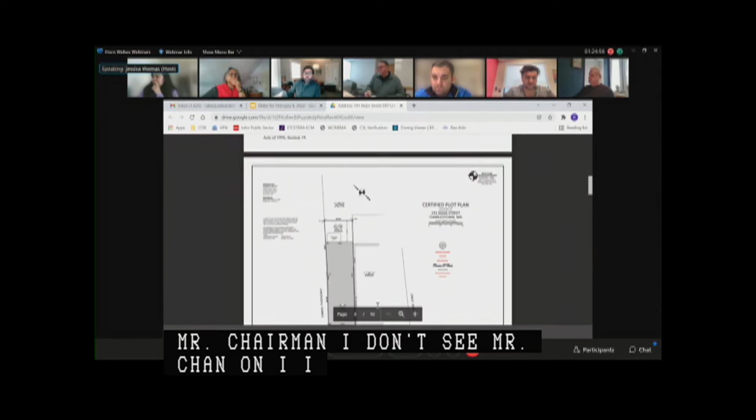This is George Moranci. I'm sorry, I had myself muted. I apologize. Good morning, Madam Chair, members of the board. My name is George Moranci. I'm an attorney with a business address of 350 West Broadway in South Boston. I represent Sing-Ming Chan, the owner of the property at 191 Main Street in Charlestown, which is a single-story commercial building located in an NS neighborhood shopping sub-district.

The proposal is for a new 4-story building, which would have a ground floor retail store with 6 residential units above. The unit sizes would be as follows: the commercial space, 894 square feet at ground level; units 1 and 3 would be 888 square foot 2-bedrooms; units 2 and 4 would be 597 square foot studio/1-bedrooms; unit 5 would be an 896 square foot 2-bedroom; and unit 6 would be a 600 square foot studio/1-bedroom.

The floor plans show on the ground level the retail unit with a basement used for storage only, as well as utilities and a mechanical room. The main entrance to the retail unit is from Main Street, with the residential entrance to the right of that. In the rear of the first floor would be the building's mail and package lobby, with the landscaped rear yard in the back providing approximately 500 square feet of open space.

Each of the 3 floors above would contain 2 units. On the 2nd, 3rd, and 4th floors, as I said, there would be 1 two-bedroom unit and 1 one-bedroom unit. So the total bedroom count for the building would be 9. The building's height would be 41 feet, which is one of the items for which zoning relief would be needed.

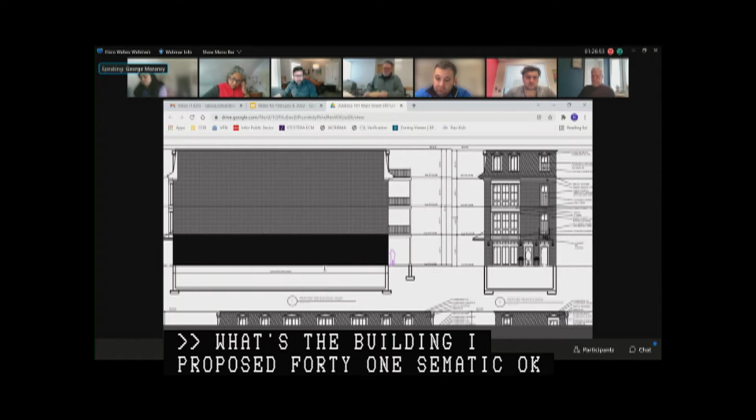The site is within an approximate 7-minute walking distance from Community College T Station. A variance is required for excessive floor area ratio. 2.0 is allowed, 3.15 is being proposed.

The required rear yard setback, 17.45 feet with the shallow lot exception, is being provided. The building would actually have a rear setback in excess of that at 20 feet, but the rear decks are within that setback area, hence the citation for insufficient rear yard setback.

The zoning refusal letter cites a violation of insufficient usable open space, but this is an error. Code requires 50 square feet per dwelling unit for a total requirement here of 300 square feet. As I mentioned, the landscaped rear yard by itself is 500 square feet. In addition, each unit would have an 8-foot by 12-foot rear deck, providing an additional 96 square feet of open space per unit.

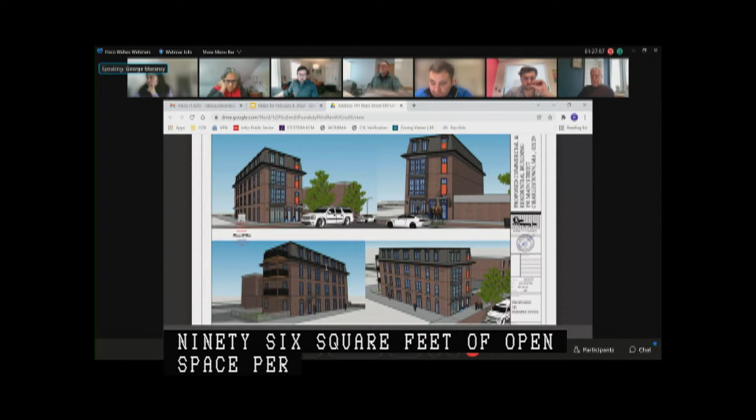The building meets the front yard setback requirement, meaning it would be in alignment with existing buildings on the block. The reason for the citation is that the plans examiner regards the small overhang above the residential entry to be within that front setback area. There would be no roof decks on the building. With that, I'll pause and take any questions members may have.

Mr. Moranci, is this an elevator building? In other words, how are you accommodating your handicapped unit? Looking at the plan set, Madam Chair, there is a lift in the rear that provides access from the ground floor level up to the... I believe there's no requirement, Madam Chair. I did inquire of the architect about that, and I believe it's compliant in a mixed-use building. I'll check my notes on that, but I'm pretty sure I did inquire about that.

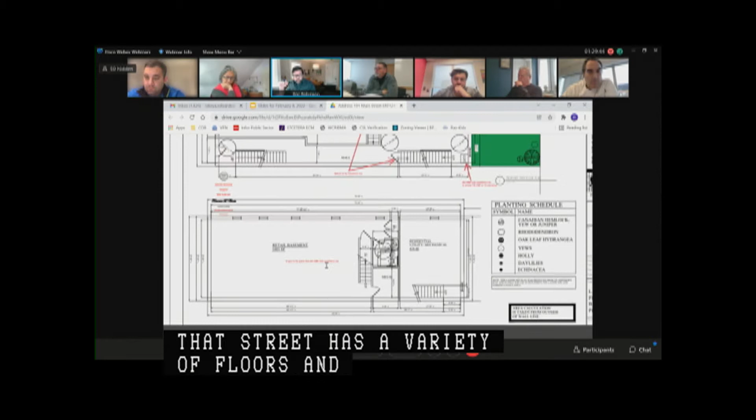How are the plans, Mr. Robinson? So the plans are good. I did have the same question. A lift is actually called out on the ground floor plan, but it doesn't seem to extend to the second floor, or there's a bathroom there. So I think that needs to be verified. And I think the height is above zoning. However, that street has a variety of 4s, 3s, and 1s, so it has a bit of context to it as well. So no questions for me on the proposed scope other than those things.

Thank you. Any questions from the board? Is anybody here to speak in support or in opposition to this proposal?

Good morning, Madam Chair, members of the board. Keaton Stapleton with the Mayor's Office of Neighborhood Services. Our office held an abutters meeting for this project on December 13th. We've received both support and opposition for this project: 5 letters of opposition with 18 total signatures, most relating to the height of the building, parking, and privacy, but also 44 signatures of support. At this time, I'd like to defer to the board.

Good morning, Madam Chair, members of the board. Michael Benetti from the Office of Boston City Councilor Lydia Edwards. The council would like to go on record in support of this project. Thank you.

Madam Chair, Secretary here, I have 2 letters of opposition. I have nothing else. Madam Chair, I have no raised hands at the moment.

Okay, given that information, may I have a motion? I'll make a motion to approve with BPDA design review and no building code relief for accessibility. Is there a second? I'll second that motion, Ligris. All those in favor? Aye. Any opposed? Motion carries.

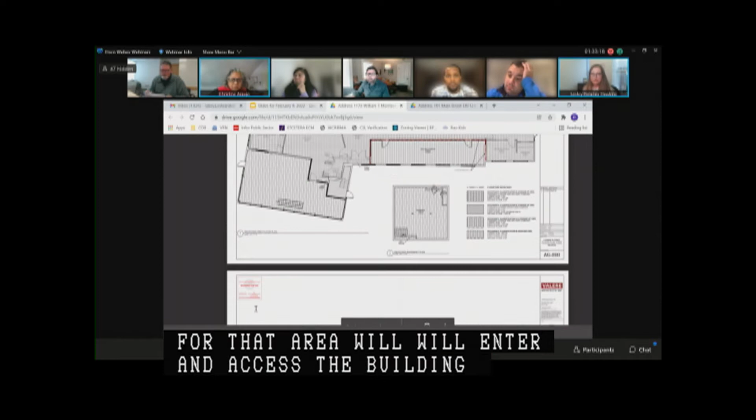Hold on, can you tell us which plan we should be looking at? There are 2 floors. For this purpose, and I know Matt O'Boyle, our architect, is on the phone as well, I would look at page 3 of the plans, sheet A100. So this is the portion that's going to be for the warehouse use. On the far right of the plans, you can see the area in which employees will enter and the secure vestibule to ensure that anyone accessing the space actually has legal access. Sorry, Ms. Edwards, I think the plan is A100, is that what you said? Yes, that will show the plan in more clarity. The sheet you were on is the code review / egress plan. Okay, sorry, please go ahead. No worries, this is the demolition sheet, you want to go down a few more sheets? Sorry. Two more down, I was going to say, so is it page 3 or? There you go, right there, that's the plan, yep.

All right, thank you, Matt. So again, on the far right, this is where our employees for the warehouse use will enter and exit into the secure vestibule where they'll be ID'd. At the top to your left, you can see the secure delivery door, that's where deliveries of product will be taken, and then they'll be brought into the secure areas for breakdown and storage. So that's the warehousing use.

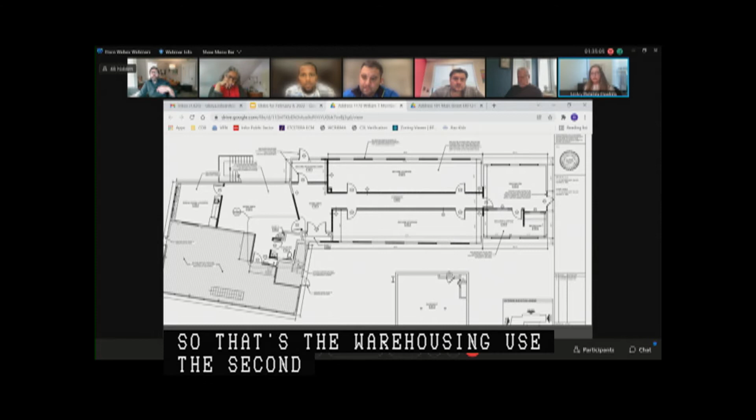The second floor will serve as the delivery-only operator, or courier model. It's almost Uber Eats for cannabis. The vehicles will be dispatched from the office located on the second floor, and they will pick up product from licensed recreational and medical dispensaries and deliver directly to consumers at their address. You cannot have any deliveries outside of an address or to a business. Those employees will enter and exit via the stairway and door at the far left of the plans.

Delivery will take place daily from 12 p.m. to 8 p.m. in 2-hour increments to minimize the amount of traffic in and out of the site. We anticipate a total of 10 delivery vehicles, approximately 4 of which will not be stored on site because they will be for the courier use only, and 6 will be stored on site in the existing fenced-in parking lot for the warehousing use. There is not going to be any public-facing or retail component. This is strictly delivery, so the general public will never have access to this space.

And how many staff are you anticipating being on site? We anticipate approximately 30 employees, a combination of full-time and part-time.

And tell us about your security measures. This will be a fully alarmed and secure building, adhering to all CCC compliance. We will have exterior lighting that will be activated at all times. We will also have 10 internal cameras and 8 external cameras, and of course the City of Boston and the state will have access to that footage, which will be stored for a period of 90 days.

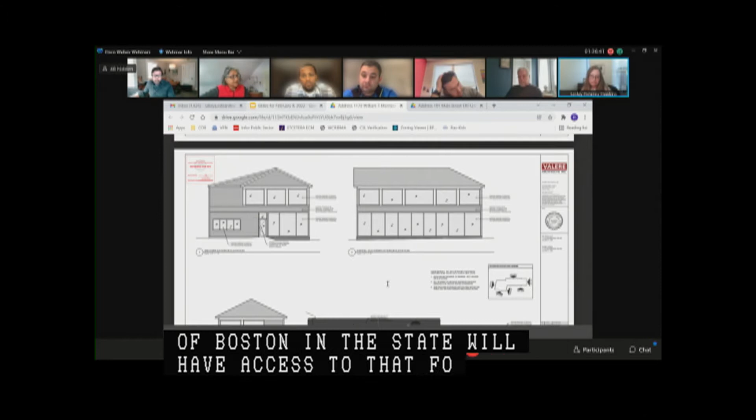Has this been approved by the Cannabis Commission? Yes, it has. The applicant has appeared at 2 separate hearings before the BCB because the 2 license types were actually promulgated by the state at 2 separate times. So we've been going through this process for a significant amount of time. I believe the BCB submitted a letter of support, and Councillor Baker submitted a letter of non-opposition.

Hold on, we'll hear that from the Mayor's Office of Neighborhood Services and from the City Council, but we need to understand the technical details from you. Can we go to the site plan to see how parking will be stored on site? Tell us which drawing we should be looking at.

Matt, which drawing would you suggest? That would be the first sheet.

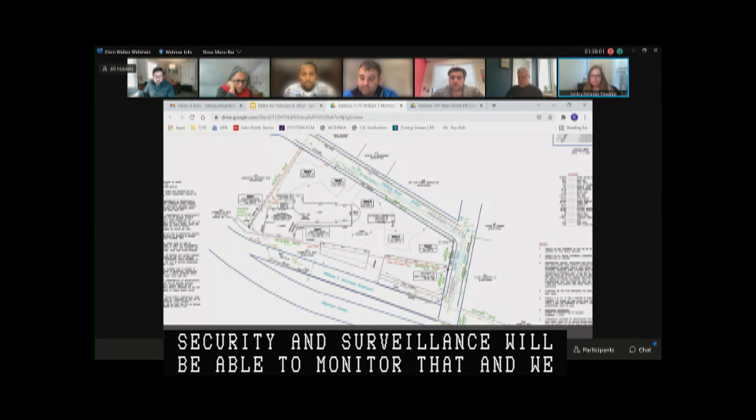Our staff and employees will access the site via one of the 2 existing curb cuts. We also will not be allowing our staff to utilize the adjacent residential streets. That was one of the conversations we had with the neighbors, and because of the extensive security and surveillance, we'll be able to monitor that, and we will be implementing a demerit system for any employees who do utilize those residential streets. So are there any curb cuts on the residential streets, or is every access through Morrissey Boulevard? There are no curb cuts on the residential street.

Are you proposing any screening and buffering to the property or any signage? There is an existing fence which we will be maintaining and repairing, and there is an existing billboard which is not our property and we will not be utilizing. All signage will be in compliance with all of the BCB regulations as well as the CCC regulations. There are photos on sheet 4 of the existing conditions that will be restored to new condition.

So, what sheet shows the signage? The signage is not shown. It's the fencing that's shown on sheet 4, photos of the existing site. Okay, and what does the state require regarding signage? Is my understanding correct that you cannot show a cannabis leaf? Correct. There can be no slang and there can be no images. There can also be nothing that would be appealing to anyone under the age of 21.

So then the next question is, we know how people's ages will be verified on site, but how are you going to do that through delivery? Absolutely. The state also has very strict requirements regarding the delivery itself. I know Gabe Vieira, who is the actual applicant. Gabe, do you want to briefly touch on the process for identifying consumers once you're delivering directly to them?

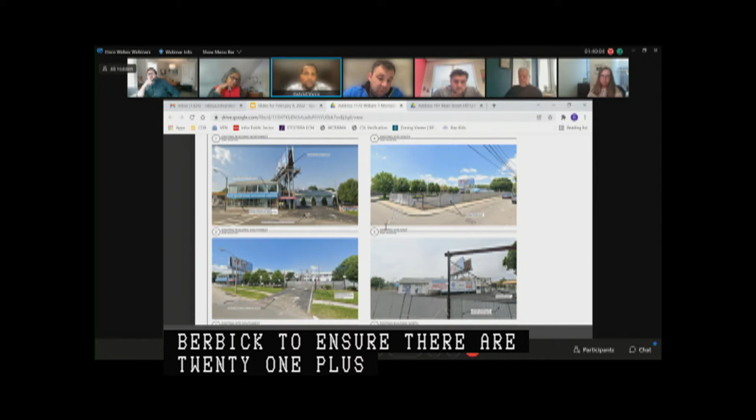Of course. Our company built a tech platform, ziprun.com, which you could look up. We integrated with a company called Berbix, which is an ID verification checker. So before any consumer can receive a delivery, they have to upload their ID via our integration with Berbix to ensure they're 21 plus. Then once our driver gets to the consumer's doorstep, they check the ID once again, so we're double checking the IDs to ensure consumers are over 21 years of age.

There are also tracking mechanisms on all of the vehicles, and at least one of the delivery employees—there are always 2 in a vehicle—they're constantly being reported via the reporting system required by the state. And is there a lockbox in each vehicle? Correct, yes.

How are the plans, Mr. Robinson? The plans are fine in terms of the proposed scope. I do think that, you know, this is a very prominent site. I have a lot of familiarity with it, so I think we need to make sure the site receives a little bit of care. It's been in a state of disrepair for many years.

I do have a question, maybe not at hand, but on the billboard itself. When I was working on the site previously with the Sozio owners, they told me the billboard was—I don't know the terminology—but local to the business directly at hand. It is not a public billboard, it's a private one.

So how is that going to remain and not be used by you as the operator of the site? In our lease agreement, we have no legal right to the billboard. We're not proposing to use it. That has not been a discussion with the landlord. So does that mean the billboard will be removed because Sozio is no longer on site?

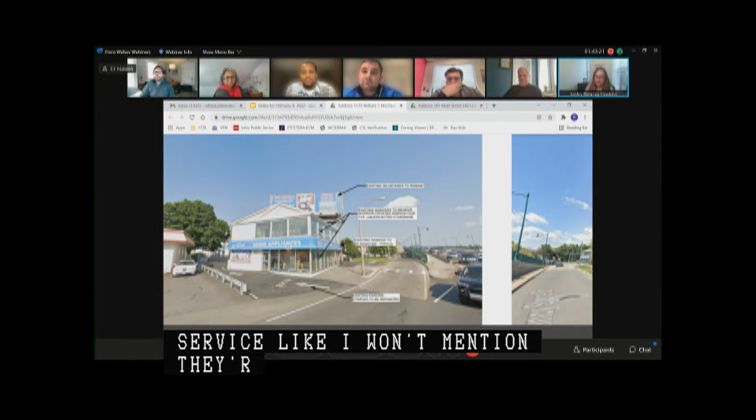And are the drivers employees of the firm, or are they one of these, shall we say, less... Yes, they're direct employees. You're not using a service, I won't mention their names. Correct, they are direct employees, and the vehicles cannot be the drivers' own vehicles - the vehicles are also owned by Ziprun. Okay, I'm very glad to hear that. Is that part of the requirement for delivery establishments? Yes, it is. Good, that's a good move. All right, thank you.

And will the vehicles have any signage in them? In other words, will the drivers be at risk through the signage? No, there will be no signage on the vehicles that would indicate that there is cannabis within the vehicle. Okay.

Just on the vehicles real quick, are there requirements to keep the vehicles updated or just any vehicle that works? The CCC conducts an inspection of all of the vehicles as well as the site, and we have an annual renewal process that we must go through as well. So they do monitor them, and as one of the first delivery operators in the Commonwealth, we'll be updating and adhering to the rules and regulations as they may change.

Is there a limit on the amount of vehicles that you can have going in and out? Like how many couriers you can have going at once? There is not a limit on the specific amount, but we are limiting it to 10 vehicles, and they'll be in 2-hour increments. They'll go out for a delivery and do a series of staff deliveries within that 2 hours, so they're not coming back and forth to create additional traffic.

And what is the catchment area for the deliveries? How far do you go from the base? Gabe, how far are you proposing to deliver? As of right now, we're starting with the 10-mile radius, and we don't really plan to extend that past 15. We want to keep our delivery focus on the greater Boston region. And is that also something in the regulations, or is that just your decision? That's just our decision.

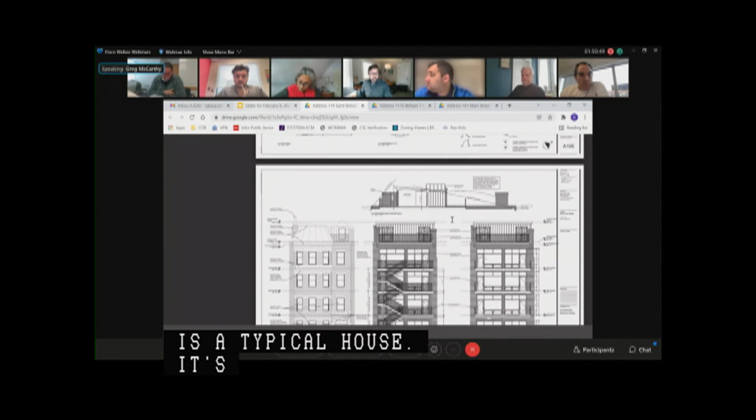Do I have control of these plans right now? No. Is it possible to go up one more page? So here's the layout of the penthouse level. This square right here, coming up the stairs, is where the existing head house is. We had to make several changes.

So tell us, what is that thing labeled loft? I have my architect on here as well, I forget what it's called. It's the dome on top of the building. Okay, so it's not habitable, it's just... It's just existing, they're all along St. Botolph Street. Okay, got it.

So hold on a minute. How are the plans, Mr. Robinson? Plans are good, no question. I think the rear decks are encroaching on an area that can handle it, it's really a public alleyway behind, with a very large building that fronts the other side.

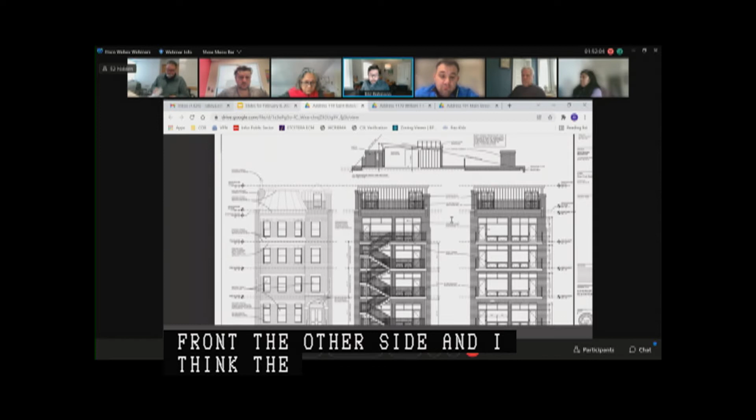And I think the addition, which I think is more of a floor, is pulled back quite a bit from the street, and it's hidden behind this sort of turret thing, and there is no roof deck toward the main street side. So I don't have any specific questions about the proposed scope.

Any questions from the board? This is not really a roof deck, is it? I mean, this is another floor. It feels like another story is what I believe. Yeah, is what it really is.

How does that mesh with the other neighboring abutting buildings? So most of them don't have any additional floor. They do have head houses of various sizes down the block, so this would be the first of a larger size. There's one down closer to the corner of, I don't remember, Cumberland maybe, probably similar in size and pulled back as well, but the rest are more traditional roof head houses of various sizes along the way.

So there's some precedent on this side of the street, but it does step up to a 12, 14-story building on the backside, so there's a lot of scale behind it.

This is a question for the applicant. Is this in the architectural district? Yes, it is. And have you started any conversations with the staff there on that?

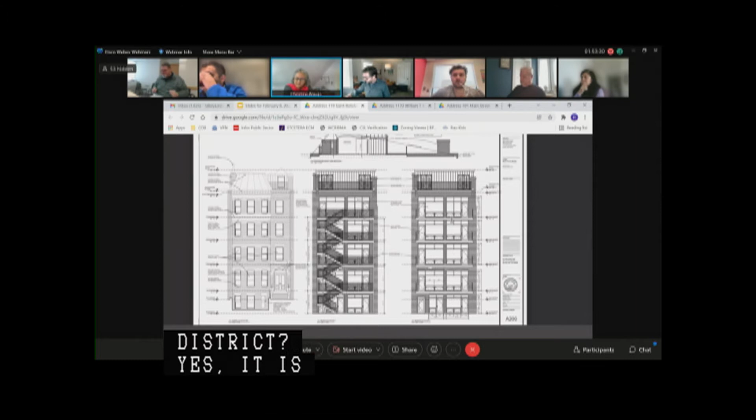Yeah, we actually had a very long process with them. They were willing to meet with us before we made our design, so we could get some input on what we'd be able to do. Also, part of the attraction down there on St. Botolph Street is that a lot of the buildings have been brought back to their original details, so they were able to give us input on what we could do to make it look like the buildings next door.

Thank you. Hold on a second, sir, go ahead. Any other questions from the board? Is anybody here to speak in support or in opposition?

Good morning, Madam Chair, members of the board. Molly Griffin from the Mayor's Office of Neighborhood Services. Our office hosted an abutters meeting on December 13th, 2021. The applicant addressed concerns and answered questions from immediate abutters who attended that meeting. At this time, our office would like to defer to the board's judgment. Thank you.

Madam Chair, I have no raised hands at the moment. Given that fact, may I have a motion, please? Sorry, but we also have a letter of support from the Architectural Commission. Hold on, can you hold on please? This board is in conversation here. Oh, sorry. May I have a motion, please?

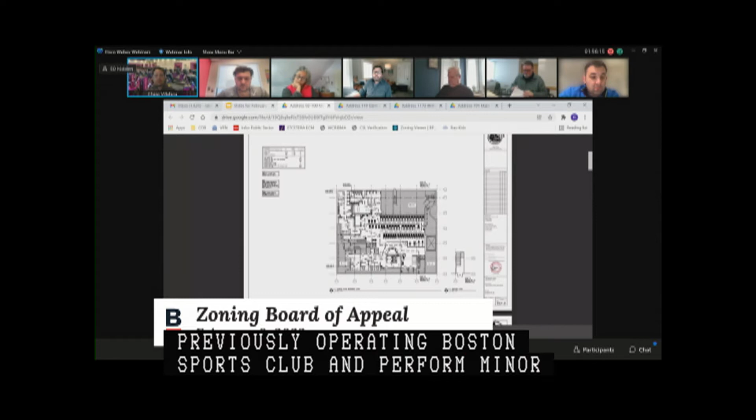I'm here today, and we're proposing to take over the previously operating Boston Sports Club and perform minor interior alterations to the cellar and sub-cellar spaces which the former Boston Sports Club occupied. The storefront area on grade will be utilized for entrance and exit only to access the cellar space where the gym will be located.

Mr. Villafana, the reason you're here is that the 24 hours is conditional use. So tell us about your 24-hour proposed operation, the anticipated number of people coming during off hours, and how you control for security during those midnight to 4 in the morning hours.

Of course, Madam Chair. Our staff is trained in management disciplines for overnight hour operating. We have intelligent camera systems within the store and on the exterior of the building. The total number of cameras for this location is 23, and we utilize a 90-day backup HDR hard drive. During the overnight hours, we have anywhere from 15 to 30 members that come to utilize our gym. The reason we specifically request to operate 24 hours is based on our company ethos, which is diversity and inclusion for all members of the community.

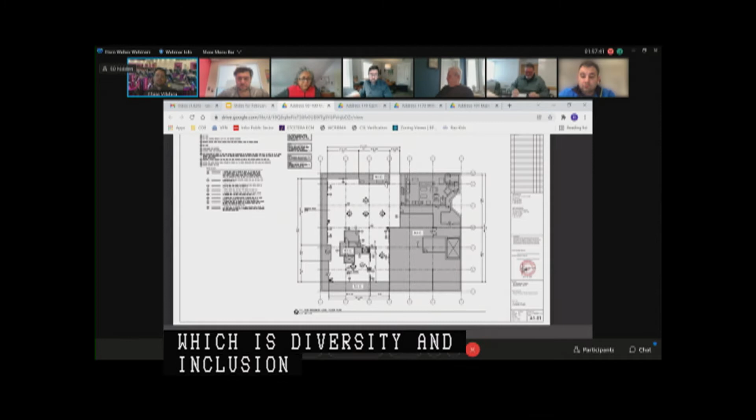Okay, so tell us how many other Planet Fitness locations within the city of Boston are 24 hours. We have 4. The closest one to this location would be our Winter Street location. And which other ones? Dorchester, Jamaica Plain, Hyde Park. There's a few others at the top of my head. They're all 24 hours? Yes, they are, Madam Chair.

Okay, how are the plans, Mr. Robinson? Plans are good, no question. I guess I had one question on access. So the access to this will be through the common building entrance, is that correct? And then the space itself is in the lower level?

That's correct. As I mentioned previously, our space is in the cellar and the subcellar. The storefront entrance on Massachusetts Avenue is solely ours, but it's entrance and exit only. There'd be no operating on the ground level. So all operations will take place in the cellar and subcellar. Okay, that was my only question. No other questions about the scope. Thanks. You're welcome.

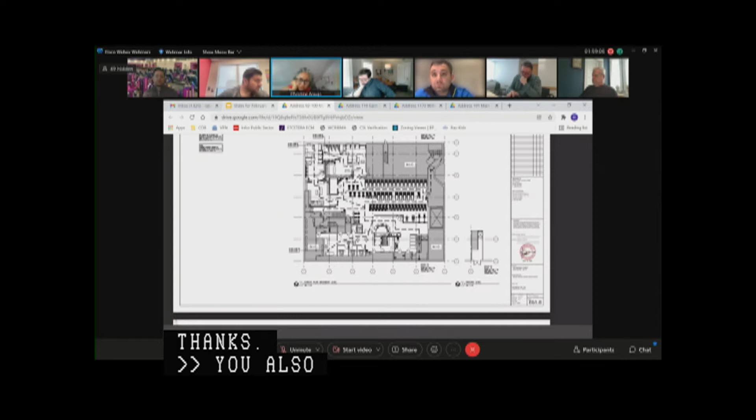Any questions from the board? You know, the thing that strikes me is that this location is very close to BU. I just want to make sure you guys explain what the system is for controlling students or others who may be inebriated at odd hours. So if you're on Massachusetts Avenue, you have to enter via the storefront.

The storefront is about 5 by 5. To access the space, you'd have to come down the stairs and physically walk past our front desk, which we always have staffed 24 hours a day. So if someone came inebriated into our gym, we'd know they weren't a member or that they were inebriated, and we'd probably ask them to leave in that instance.

Okay. Any other questions from the board? Is anybody here to speak either in support or in opposition of this proposal?

Good morning, Madam Chair, members of the board. Molly Griffin from the Mayor's Office of Neighborhood Services. At this time, our office would like to defer to the board's judgment on this proposal. We hosted an abutters meeting on December 16th, 2021. The applicants addressed concerns or questions from neighboring people and businesses. At this time, I have received no letters of support or opposition, so we'd like to defer. Thank you.

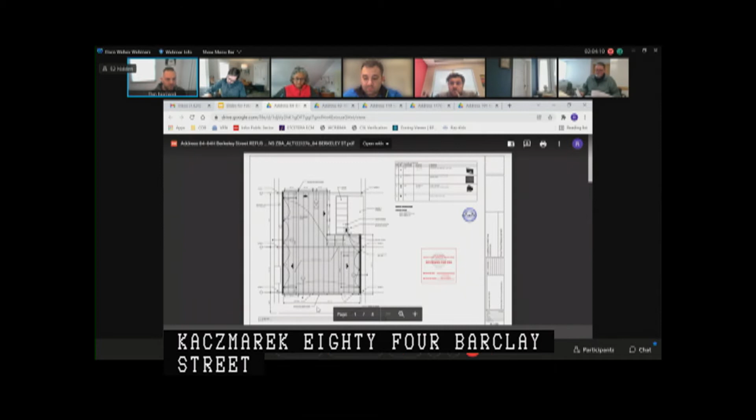Calling the next case, BOA 126-0064, 84 to 84H Berkeley Street. This is a replacement roof deck. The violation is Article 64, Section 34, roof structure restrictions. Name and address for the record, please. Dan Kaczmarek, 84 Berkeley Street. I'm here on behalf of the applicant, Matthew Palmer, who is the contractor for the project. Frank Corsino is the owner at 84 Berkeley, and he's also on as an attendee. So tell us what you're proposing to do.

We are proposing to rebuild a roof deck at this address. The previous deck was haphazardly built and has since been removed for obvious reasons. We are building back the roof deck only and keeping the existing head house that maintains access to the roof. Since this is before us, and usually replacements aren't, was that roof deck legal or was it not legal? And secondly, are you expanding the footprint of that roof deck?

The roof deck footprint is expanded. However, it's entirely within the ordinance requirements for a roof deck in terms of height and distance from rear edge.

Okay, give us the dimensions of that roof deck, please. I don't know if they're on that drawing, but I can check.

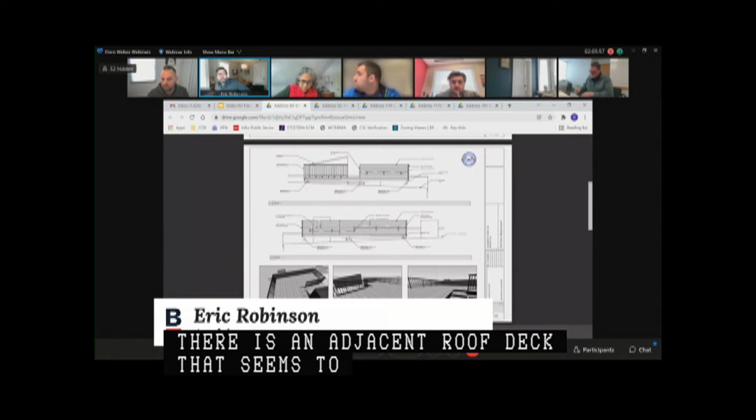While you're looking for that, Mr. Robinson, how are the plans? Plans are good. There is the previous roof deck, which is still on Google Earth, is there. It was smaller and pushed further to the back. There is an adjacent roof deck that seems to be aligning with what they're proposing in terms of its front and rear setback from the streets, and consistent with the adjacent. And the existing head house is remaining. So no questions necessary for me on the scope.

Any questions from the board? Is anybody here to speak either in support or in opposition of this proposal?

Hi, yes. Good morning, Madam Chair and members of the board. Kim Crusilli from the Mayor's Office of Neighborhood Services. Our office held a community meeting on January 4th where no opposition was shown by the abutters. The Ellis Neighborhood Association is also not opposed to the proposal. At this time, we'd like to defer to the board on this matter.

Thank you. Good morning, Madam Chair, members of the board. Ana Calderon from Councilor Flynn's office. The councilor would like to go on record in support. We heard no concerns from the Neighborhood Association or abutters.

Thank you. Madam Chair, Secretary here, we have one letter of opposition. Is there a reason for the opposition? It's 86 Berkeley Street and Mrs. Wong. She is opposed to it because she wasn't notified.

May I have a motion, please? I'll make a motion to approve. Is there a second? Second. All those in favor? Aye. Any opposed? Motion carries. You're all set. Good luck.

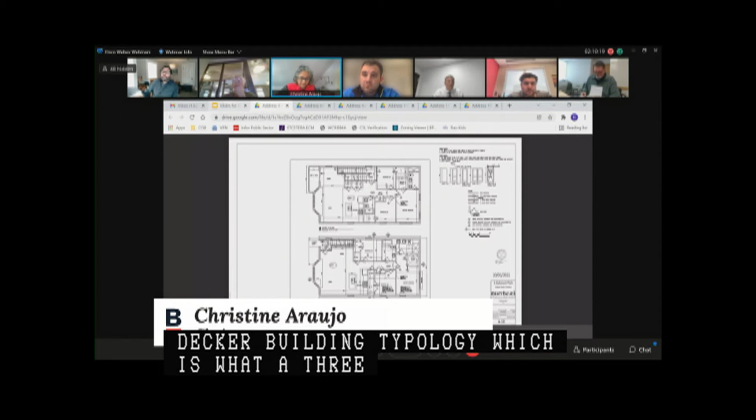Fulgini, before you proceed, have you seen the BPDA's recommendation? I have not, Madam Chair. It's a recommendation for denial because of the density and a number of related issues: open space, excessive building height, and the fact that it does not reflect the triple-decker building typology, which is what a 3FD means. So it seems like they have a serious number of concerns on this one.

So I guess the question for you is, do you want to proceed with this or request a deferral? I think at this point, I didn't understand, I didn't see that. So at this point, we'd request a deferral to meet with the BPDA staff and see if we can resolve some of those issues.

Okay, may I have a motion, please? I'll make a motion to defer. I'll second that motion, Ligris. All those in favor? Aye. Any opposed? Motion carries. The date, please. We're going to do March 22nd at 11:30. Thank you.

Calling the next case, BOA 125-1716, 88 Rockview Street. This is a new single-family home.

The violations are under Article 55, Section 9: floor area ratio is excessive, the building has excessive height in feet, the building has excessive stories, the front yard is insufficient, and the side yard is insufficient.

Name and address for the record, please. Hi, this is Abby Wojtowicz and Joe Charest. We currently live at 85 Rockview Street, Unit 1, in Jamaica Plain, and we are the owners of the lot. We also have Chris Fuller from Helios, our architectural firm, on the line as a panelist.

So let me ask, was this addressed before the Board of Appeal in the past? No, you've checked the record and there is no prior proposal for this address.

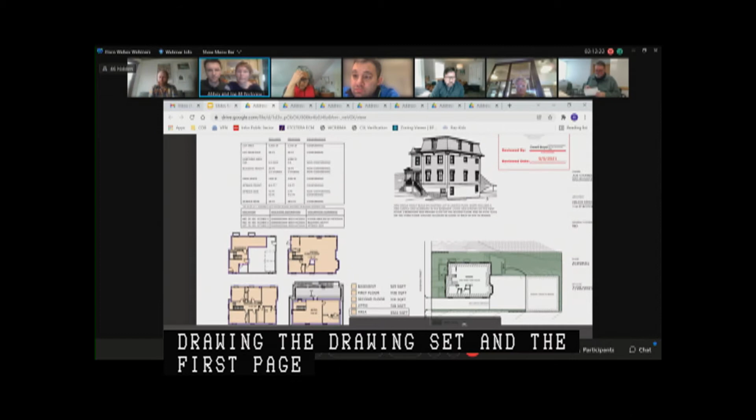Okay, so please go ahead, tell us what you're proposing to do. Sure, we're proposing a single family house, which you can see on the first page of the drawing set. The first page also gives an overview of how the property is situated on the lot. Joe, you can go over some of the violations.

The side yard and front yard violations can be seen here. If you zoom into that part with the green around it - right, the front yard plane of the house is actually not in violation, but we have added a front stoop where the door swings out. Because that front stoop has a small roof on it, that makes it count as part of the dwelling, so that's why it's in violation of the setback.

So you're 3 stories instead of 2.5 stories. Correct. What does that mean for height? How high is the building in feet? You can go to the last page. Can you just tell us? It's 36. And what is the required? 35.

Front yard insufficiency, FAR, what's required and what are you proposing? It's 0.5 is the requirement, and we're proposing 0.6. And what's the square footage of the lot? I think it's 5,500 square feet.

Chris Fuller, do you have that handy? It's 5,470, Madam Chair. Thank you. And is this a one-family zoning district? Yes, it's actually a 2F 7000, so basically for the first unit you need 7,000 square feet.

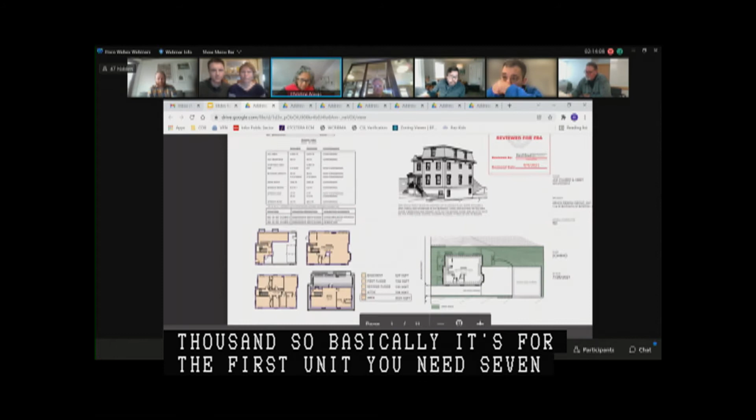And it looks like there are environmental reasons why the building is where it is, because you have a steep slope in the rear. Correct. There's a rock wall there that we don't want to push the house into.

Okay, and how many bedrooms in here? It will be 5 bedrooms. 6. I'm sorry, 5 or 6 bedrooms? 6. Okay, so just for the record, the zoning requires that at maximum you can have 4 unrelated individuals, so if there's any plans to rent out or anything else, please keep that in mind.

How are the plans, Mr. Robinson? Plans are good, just one question. So there is an in-law suite called out on the attic level, is that correct? That's correct. Can you give us a little bit of information on that?

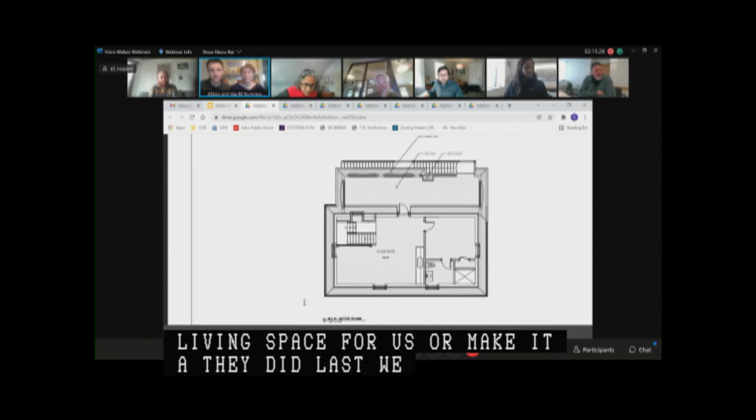Yeah, we're basically finishing the attic area as a living space, and we intend to either build it as just living space for us or make it an in-law suite where older parents could live at some point. So there is no kitchen up there, it's just accessed through the house? It's accessed through the house. I think there could be a kitchen, though.

No, what's before us is for a 1-family, not a 2-family. Correct. Okay, so we just want to make sure that this is, in fact, a 1-family that we're looking at. That's right, that's right. Okay, any questions from the board?

Mr. Ehrlich? No? Is anybody here to speak either in support or in opposition of this proposal?

Madam Chair, members of the board, Connor Newman with the Mayor's Office of Neighborhood Services. At this time, the Mayor's Office would like to defer to the judgment of the board. Some background information, this proposal was approved by the Jamaica Plain Neighborhood Council, and during the community process, our liaison could not recall any opposition or concerns. Thank you.

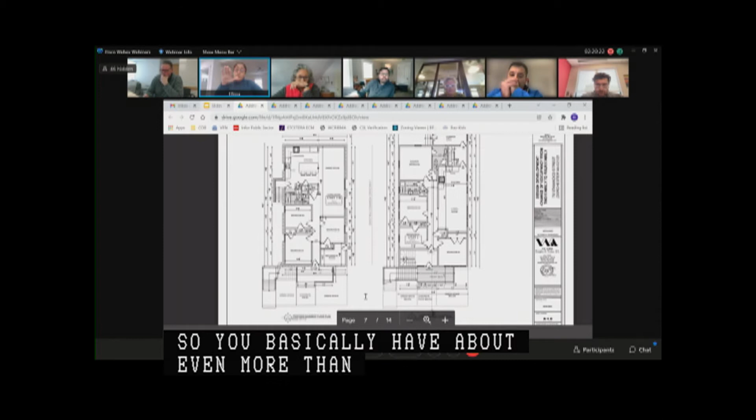Yes, I'm looking at the Redfin photos of the building, and it looks like in the rear... so tell us about the floor-to-ceiling height, and the floor-to-sill height in that basement. The ceiling height inside, from finished floor to finished ceiling, is 7'9". In the front, if you look at the elevations, you have direct access from grade. Going toward the back, because of the nature of the lot, it pitches upward, so more than 50% of the basement space is above grade, going from grade level in front to below grade in the back.

So you've proposed to move the bedrooms to the front, 3 bedrooms. Can you tell us about the floor-to-sill height in those bedrooms? The ceiling height, you mean, or the exterior sills? The floor-to-sill height. Oh, as mentioned, in the front it's at grade. Going up, if you look at the elevations, it can be seen that there's no need for window wells, so we have enough space for window egresses without window wells.

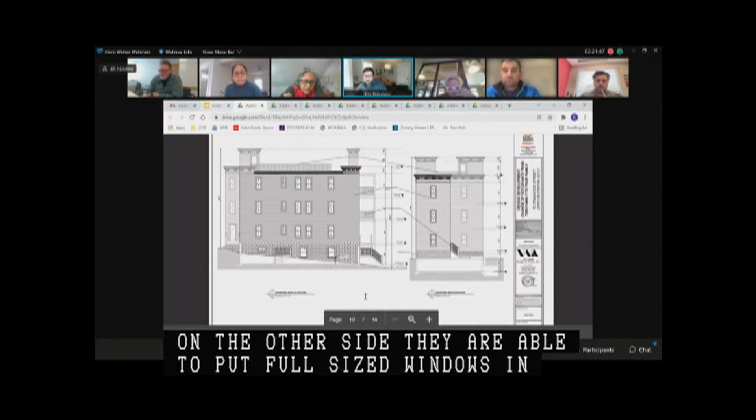If you go to A2.1, you'll see the side elevation. The sill in the bedrooms is dimensioned at 2'8" above the finished floor, fairly standard height windows. As you move to the rear, they do start to get buried in the site. That is true; however, on the other side they are able to put full-size windows in the living room as well, so the grade works in their favor. So you're basically replacing those narrow windows seen in the photos with full windows. Correct. Okay.

Tell us about the other proposed unit. Yeah, so it's basically adding a full story on the 3rd floor. We're basically lining up the building with the current conditions of what's around us there on the left side, meaning 109, 105 Stanwood Street, and also our neighbor on the right side, turning into a triple decker.

Okay, and then tell us about that roof deck and access to that roof deck. Yeah, so the intention now we're proposing is to provide a common roof deck with 2 accesses, one in the front and one in the back.

And I'm assuming that these are through hatches? Yeah, as you can see in the elevations and the renderings, there are 2 roof accesses, complete with full height. I'm sorry, are they hatches or what are they? No, it has full access. It's shown as full head houses. They're shown as full head houses. So they are head houses. Yes, both are head houses.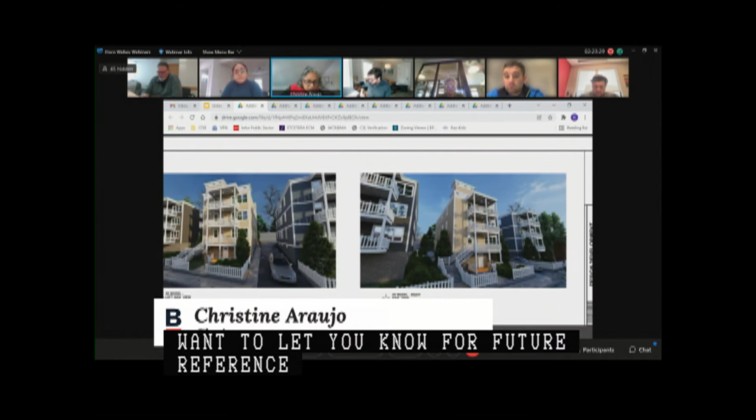So there's 2 head houses, because just so that you know, this board is not keen on head houses. We just want to let you know for future reference and for reference on this project, because in the rendering it does look like that's different than the abutters.

Understood. Yeah, tell us about the parking. Right now, due to the existing conditions, we are proposing to add 4 parking spots, which is a current condition.

Okay, let's see what else. Okay, how are the plans, Ms. Robinson? Plans are fine. I actually don't have any real issue with the basement apartment.

I think the head houses are even more ornate and larger, and I am a little worried that with 2, usually there's 1, so it has a limited occupancy. Now it has 2, so it could carry almost as many people as you want. So I think we need to question the head houses in this particular case.

Okay, any questions from the board? Madam Chair, Mr. D'Amico is on, so I'd like to see him speak if you'd like. Oh yes, of course. How are you? I don't know if you can unmute him. Yep, let me get him on. He's on the phone, give me one second.

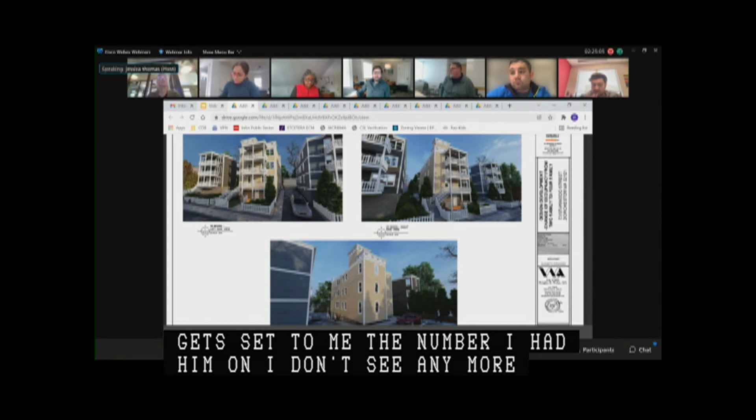The number I had him on, I don't see anymore. Let's see, are you on the 233 number, Mr. D'Amico? Yes, hi, 233, oh sorry.

Give me one second. Madam Chair, if you can't find him, I guess I could read into the record. Okay, regarding 73 Stanwood Street, reduce the number of spaces from 4 to 3 to make maneuverability safer. The space should be removed and is a space located furthest from the home. Stanwood Street is one-way and is very narrow. However, there exists a driveway directly across from the driveway at 73 Stanwood, making access and egress acceptable.

That's Mr. D'Amico. Okay, he's actually unmuted. Okay, he's all set. Bob, welcome. Thank you. We'll hear from you on the next case because Mr. Fortune did read your comments into the record, so thank you. You're welcome. Any other questions from the board?

Is anybody here to speak either in support or in opposition of this proposal? Good morning, Madam Chair and members of the board. This is Jason Gant with the Mayor's Office of Neighborhood Services. An abutters meeting was held by our office on November 29th, 2021, with about 6 participants. The applicant answered all questions and concerns raised, specifically around the basement unit and also the addition of the 4 units, as some folks felt that 4 units was a little bit much. The only other addition is that Mike Kozu from Project Right has reached out so the community can get another look at the actual proposal. We are going to be deferring this to the expertise of the board.

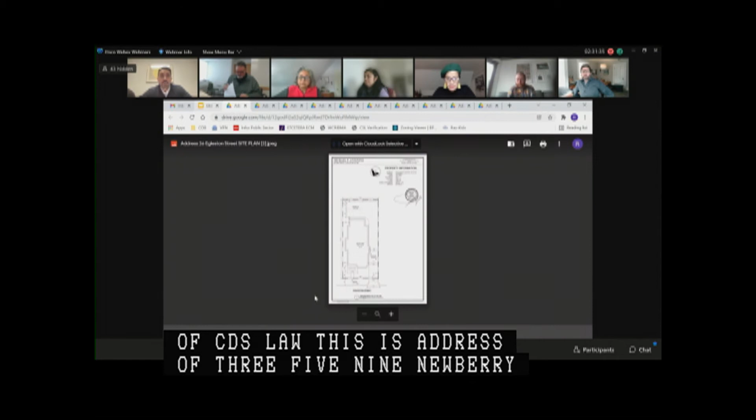Name and address for the record, please. Madam Chair, members of the board, this is Kyle Smith of KDS Law, business address 359 Newbury Street, Boston Back Bay. For the record, thank you for your approval of the proposed Planet Fitness, which is going to be in the basement of our building. Thank you very much for that.

So please tell us what you're proposing here. Madam Chair, there is currently an existing 3-family structure on site, with an existing driveway that doesn't currently serve multiple parking spaces to the rear of the structure. It's my understanding that when Eggleston Street was converted to a one-way at a previous point, a lot of owners did successfully petition and obtain approval for off-street parking. The prior owner, before my client purchased this property in January of 2020, mounted the curb for parking. So there's not currently a curb cut on site, but the property was, for all intents and purposes, used as off-street parking. My client wants to legalize that and also include additional parking to the rear of the parcel, extending the existing driveway to the right of the structure to provide 2 spaces to the rear, with an additional 3rd space closer to the street on the right side of the existing structure.

Ms. Edwards, can you move the plans a little bit so we can see the rear of the property? Mr. Smith, can you tell us where that 3rd space would be? Yes, I'm not sure why the plan generator did this, but there are actually 2 pages of the site plan, Madam Chair, both in the possession of Stephanie Haynes. One page shows the existing parking space and drive, which is on the front.

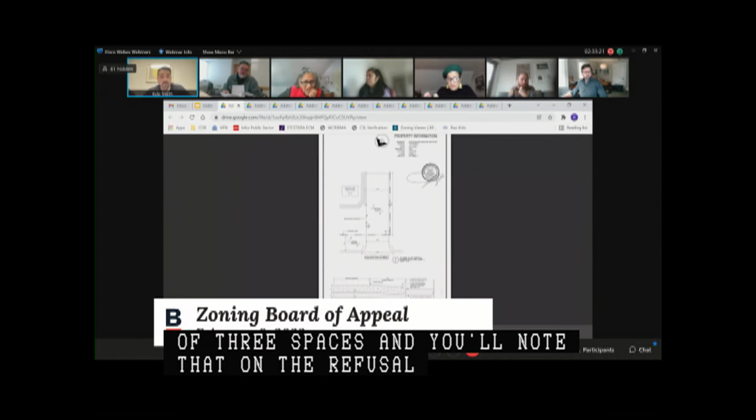There you are, that page. And then 1 shows the rear. So it's an aggregate of 3 spaces, and you'll note that on the refusal letter issued by ISD, it references an aggregate of 3 parking spaces. So in other words, Madam Chair, 1 is towards the front of the drive near the street, 2 are to the rear.

So hence we have maneuverability. I think the question for us is, if one of the cars in the rear anticipates exiting, what happens to this car that's in the front, which looks like it might in fact be partially front yard parking? Madam Chair, as is not terribly uncommon, we do have tandem spaces often. So to answer your question, this parking space, they'd have to do a little bit of dancing, unfortunately, with vehicles.

But that's why we are cited for a maneuverability issue. So this car affirmatively is parking in the balance to the rear. Whether the actual parked car is breaking the front plane of the building or parked farther deeper into the driveway, there is certainly room for it, and that's currently how it's being used.

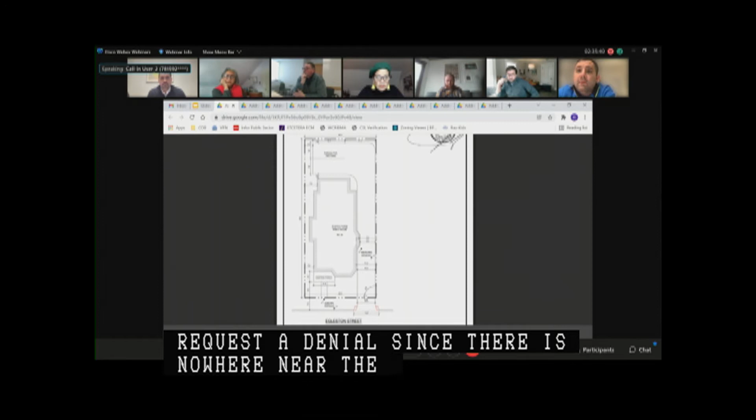Thank you. And Mr. Robinson, how are the plans? I think you get what you see, because it is quite tight along the whole edge, and it would be challenging, I think, to maneuver back there for certain. But if there's 3 parking spots off the street, I don't know if that's a benefit or not.

Any questions from the board? Yeah, is that 8 foot 5 inches and then 8 foot 4 inches for the width where the bump out is to the property line? Is that what I'm reading? That's what it says on the plans, yes.

Okay, I mean, that's not sufficient to get a car through either. It's tight, very tight. And there's a curve to the right, because the site sort of drops a little bit, so this is down a little bit. So it is very tight. I agree with that, yes. Okay, any other questions from the board?

Is anybody here to speak in support or in opposition of this proposal? Yes, Madam Chair, members of the board, Connor Newman with the Mayor's Office of Neighborhood Services. This time the Mayor's Office would like to defer to the judgment of the board. We have some background information. ONS did host an abutters meeting that was very lightly attended. There were no serious concerns raised at that meeting. They went on to the Jamaica Plain Neighborhood Council, which recommended approval. Thank you.

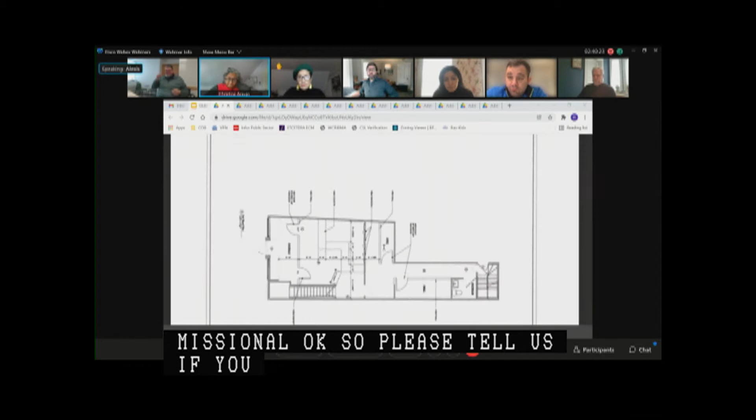Okay, so please tell us, are you within 1/2 mile of what? We are within 1/2 mile of another cannabis establishment. The applicant here is an economic empowerment applicant with the Commonwealth of Massachusetts. So can you tell us how close the other cannabis facility is? It's approximately a 6 to 8 minute walk, and it's about 1,200 feet short of the 1/2 mile necessary.

Okay. And has this been approved by the Cannabis Control Commission for this location? It has been approved by the Boston Cannabis Board for this location. The applicant has been approved by the Cannabis Control Commission with a provisional license and certifications. I mean, that's fine, but our concern is that it is within the 1/2 mile buffer, and so that is our concern.

And are you in proximity to a grade school? We are not in proximity to a grade school. Or a K to 12 school? We are not. Okay, okay. And so this is forbidden use, and the reason that it's a forbidden use is because of proximity, and the reason it's conditional use is because it's a marijuana facility.

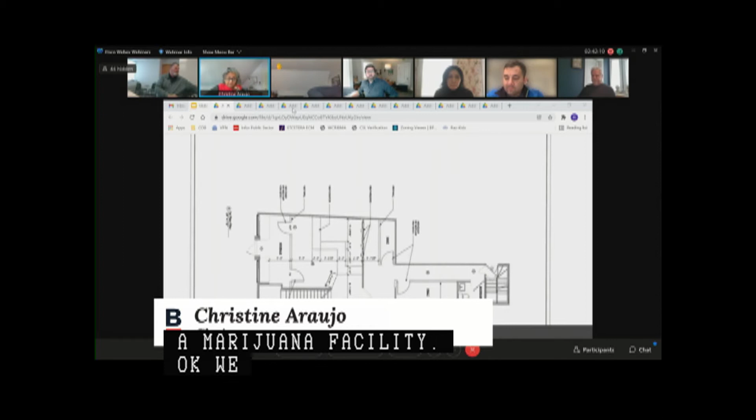Okay, well why don't you go ahead and tell us what's being proposed, but just know for the record that this board does not look kindly on projects that are within 1/2 mile of other projects.

Completely understand, I'm going to speak quickly because I also see that at-large Councilor Mejia is in the chat hoping to speak on this matter, and she only has until 11:30, so I'm going to speak quickly. Yes, please give us the meat of the matter so that we understand what's being proposed.

So the meat of the matter is that it is within a buffer zone of another cannabis establishment. I recognize that this board has a strict scrutiny regarding these buffer zones, appropriately so. Generally, the zoning was established so that cannabis establishments would not be clustered in a green mile, if you will, within our city, similar to those out in Colorado. So when Boston set up its zoning map, it wanted to avoid these clusters and wanted people to make their case of why this wouldn't cluster a neighborhood. In this case, as I said, it's a 6 to 8 minute walk.

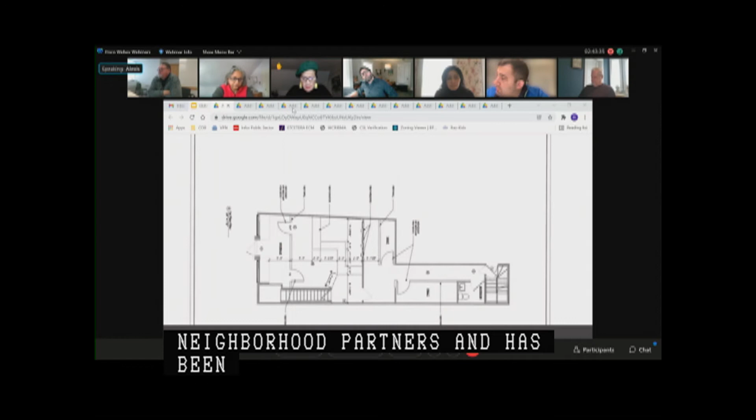It is directly across the street from an MBTA police station. The applicant has worked with neighborhood partners and has been approved by the Community Alliance of Mission Hill, and also has a good neighbor agreement in place with Mission Hill Neighborhood Housing Services, which is in between this establishment and the other approved cannabis establishment.

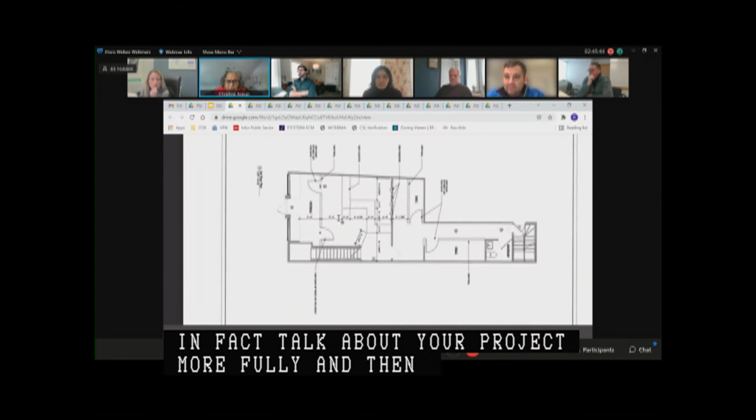Madam Chair, I do have a few raised hands. No, let's go back and hear from the applicant so that they can talk about their project more fully, and then we will proceed as normal. We just took the Councilor out of sequence because she had other commitments. Thank you so very much.

Madam Chair, I'm a little confused. Is Councilor Mejia in support or opposition? She's in opposition because she would like the half mile radius respected. Thank you. Okay, so let's hear from the applicant because we do need to give somebody due process about specifics about this proposal, and how it would work, etc.

Specifics about this proposal, as I stated before, it's a 6 to 8 minute walk between the establishments. This walk is separated by large industrial lots, a DCR operations lot. It is not clustered. The two cannabis establishments are not clustered in a way that they would unduly burden the neighborhood. What is the address of the other cannabis facility? 123 Terrace Street. Oh yeah, of course. Yep, got it.

Okay, so tell us about the operation, and tell us about how it's proposed to work. Tell us about security, hours of operation. Does it have off-street delivery? Because Tremont, Parker, and Gurney Streets are all busy streets. So tell us how this project is supposed to function in this location.

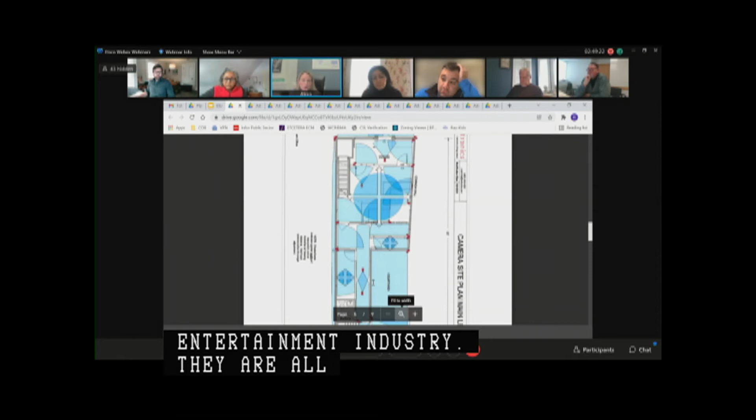They are a local, diverse entrepreneur couple that is owner and operator of Mojitos Country Club in Randolph. They also were a longtime license holder in the city of Boston, downtown Crossing, without incident. What is their facility downtown? Their facility downtown is on Winter Street. They no longer have that, but they had it for more than a decade without incident. And what was it? It was Mojitos Bar Nightclub. Okay, yes, oh yeah, of course.

So how are the plans, Mr. Robinson? Plans are fine. It's very, very basic in terms of the plans themselves. I guess I'm just trying to make sure I understand it.

I'm looking at their diagram, and the 500-foot buffer seems to actually go through the Tobin K through 8 label of the school. So I'm questioning the dimensions of this, and looking at the aerial and measuring it, it looks like it's within 300-ish feet of the community center as well. And I know this route is trafficked highly by kids going to the Orange Line T and things. So I think location, I guess, is a question for me.

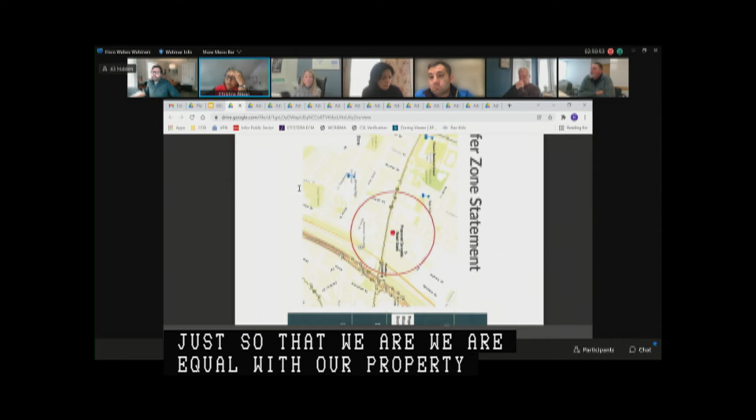And I think, Mr. Robinson, just so that we are equal with our property, is there enough space, should there be overflow, for people to line up? Does it look like there is enough space? So there is interior space. I think it's tight, it's not a very big space, so I think that's probably fine. There is a waiting sort of area, a vestibule, that's not just a vestibule.

It's larger than that, and there is a fairly clear sequence through the front space. The whole place isn't very big, but there is adequate space off the street for a couple people, maybe 2-3, to be waiting. I don't see the security that we typically see before people are buzzed in, but that just might not be represented on the plans. This plan that's up now doesn't show any detail. It's in the other package of information. So I don't know if there's a security desk in that small vestibule, which would change the dynamic because it is small.

Miss Edwards, can you pull up that section of the plan so we can see how they've submitted this? Is this what you're referring to, Mr. Robinson? Correct. Tremont Street's to the left, that's the entry point. You can see the vestibule is pulled back, a dimension of 5.5 feet, which is adequate, with what looks like some benches, but I just don't know if they have a security point in that vestibule.

Okay, any other questions from the board?

They also have a basement area. I don't mean to interrupt the board, but there is a basement area. Alexis, please stop, the board is in discussion, okay?

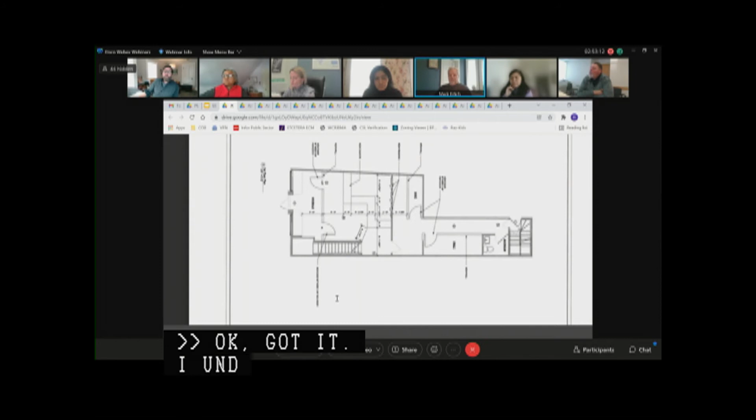I have a couple of questions. In addition to the Tobin Community Center, across the street on Tremont is RCC and Madison Park. What's the distance from the establishment to those facilities? It is more than 500 feet, I can type in the exact figure. With respect to the Tobin Community Center, it's 443 feet away. And the Tobin Community Center is part of the advisory board of the Good Neighbor Agreement to work with the operator. Okay, got it. I understand that both RCC and Madison are more than 500 feet, but as Mr. Robinson pointed out, people gather at the T-stop there.

This whole issue of buffer zones continues to drive me nuts. Are we absolutely enforcing the half mile, or are we not? The issue of equity compromises those rules. It seems every single case is treated on its own, and the Boston board apparently approved this knowing it's within the half mile buffer zone. I've always asked that we get clear direction on what the city policy is, and we've never gotten it. Yeah, but I suppose then it leaves us to, quote, create policy. Yeah, it's zoning by relief.

So let's see, any other questions from the board? Is anybody here to speak either in support or in opposition of this proposal?

Yes, good morning, Madam Chair, members of the board. Molly Griffin from the Mayor's Office of Neighborhood Services. At this time, our office would like to defer to the board's judgment regarding this application. There was a community meeting held on June 24th, 2021, where there were concerns and support both shown by neighbors and members of the community. At this point, I have received 6 letters of support, including from the Community Alliance of Mission Hill and the Mission Hill Neighborhood Housing Services, with whom the applicant has a good neighbor agreement. I also received, which I believe the board has, a letter of opposition from the chair of the board from the Tobin Community Center. And as was said, the Boston Cannabis Board approved this on December 15th, 2021. Thank you.

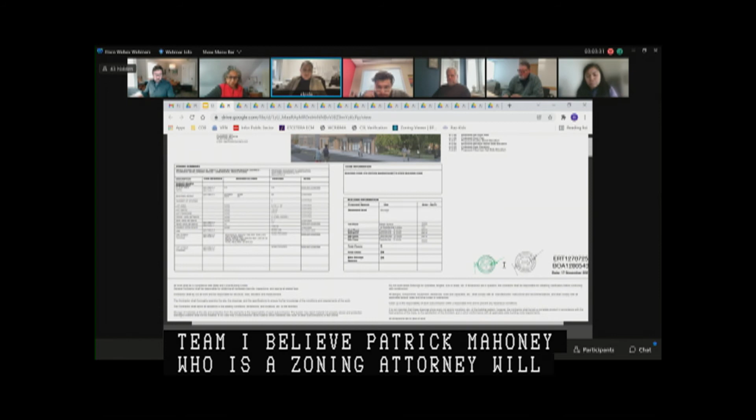I just want to, let's wait for him. Actually, is he on? In the meantime, Mr. Fortune, let's move to Crest Hill Road.

Sure, Madam Chair. Calling case BOA 1285392, 98 Crest Hill Road. This is to construct a new single-family home on a vacant lot at 98 Crest Hill Road. The violation is Article 51, Section 9, lot area insufficient; Article 51, Section 9, lot width insufficient; and Article 51, Section 9, building height excessive in stories. Name and address for the record, please.

May I have a motion, please? I'll make a motion to defer. Second. All those in favor? Aye. Any opposed? The date, please. You'll have a date of March 22nd at 11:30. Thank you very much, see you then.

Take care. Calling the next case, BOA 1283800, 128 Webster Street. This is adding an interior stair hatch and roof deck. The violation is Article 27T, this is in the East Boston IPOD. Article 53, Section 52, roof structure restriction. Article 53, Section 9, front yards insufficient. Article 53, Section 9, side yards insufficient. And Article 53, Section 9, the rear yard is insufficient.

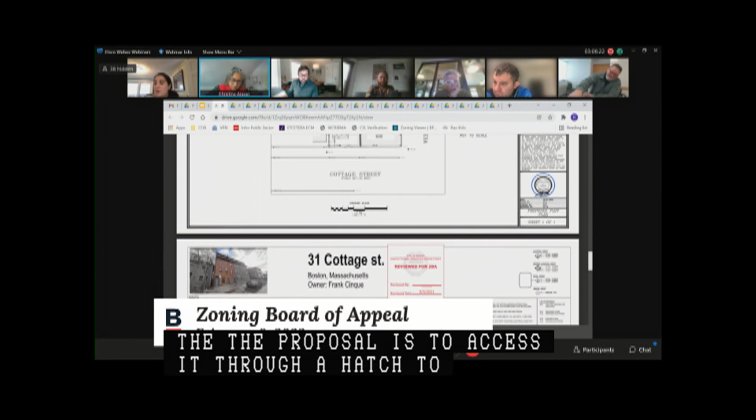Okay, and so the proposal is to access it through a hatch to the roof deck. And tell us about that roof deck. Sure. The roof deck, we've actually set back 9.8 feet from the front; 10 feet would be required, but we've tried to push it back as far as we can to keep the street view relatively minimal. Depending on which way you look at this, as a corner building or as a front building, we're at 0.5 for a side yard or 2.5 from the rear yard. But I can have the architect go through the materials that are being planned. The other 2 violations we'd be subject to are IPOD and roof structure restrictions based on East Boston.

Okay, got it. How are the plans, Mr. Robinson? Plans are fine, no question, just the roof hatch and no other questions for that. Any questions from the board?

Is anybody here to speak either in support or in opposition? Yes, Madam Chair, members of the board, Connor Newman with the Mayor's Office of Neighborhood Services. At this time, the Mayor's Office would like to defer to the board's judgment. Some background: the Mayor's Office conducted an abutters meeting on October 13th. Notice we have from this is that it is owner-occupied. The local civic voted to support, and the community had recommended a hatch over the head house, which sounds like that's what the applicant has gone with. Thank you.

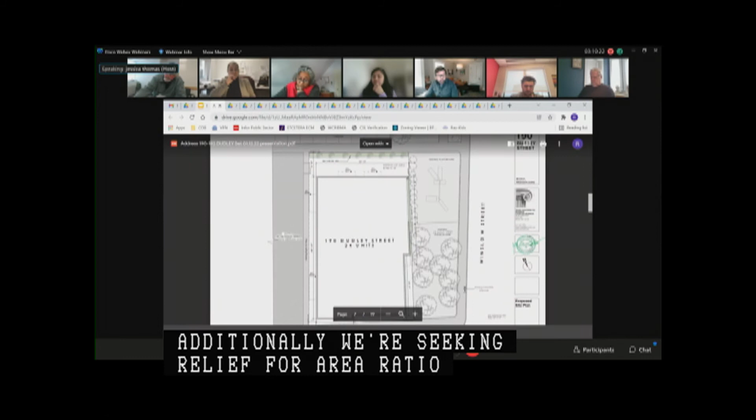Additionally, we're seeking relief for floor area ratio. The FAR in this area is 2.0, and the proposal is 3.5 FAR. We have a 3-foot side rear yard variance that we're seeking relief for, as well as parking and loading. So what's the required rear yard? The required rear yard is 20 feet, and the proposed project is 17. And the proposed for the rear yard is 17?

Okay, and then let's just see, you're providing no parking. You've gotten through the FAR. Okay, and your side yard is okay. So tell us, if it's easier, your architect can tell us about the dimensions or the average square footage of these 1, 2s, and 3s. Certainly, Madam Chair. The 1-bedroom unit minimum size is 660 square feet, which is about 45 square feet larger than required, and the largest 1-bedroom is 750 square feet. The 2-bedroom units range from 852 to 945 square feet, of which there are 16. And the 3-bedroom units are 1,225 square feet.

Additionally, previously presented to the board, there were 4 IDP units for then 28. We left the IDP the same despite the reduction in unit count, so there will still be 4 IDP units. That was important to the elected officials and the community. One of the 3-bedroom units will be an IDP unit, 2 of the 2-bedroom units will be IDP, and one of the 1-bedroom units.

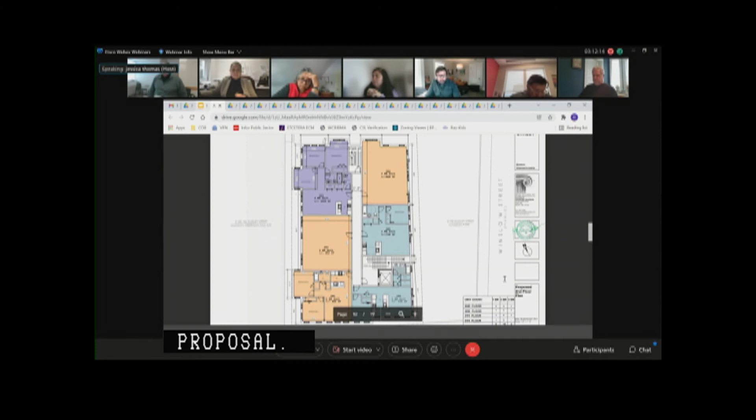Any roof deck proposed? There is no roof deck. It's worth noting that in a recent comment from the public and an elected official, they requested we have a gathering space in the rear for the residents, and our clients have agreed to do that, specifically tables with umbrellas and a potential barbecue area. And that's in the rear yard? Yes, within the 17-foot rear yard.

Okay, so tell us about parking. At our last meeting, we had a proposal that came in — I think you were the applicant on it — with 5 parking spaces. My comment at that point is when does this neighborhood reach a capacity issue with all these projects coming through with no parking or few parking spots? That's correct, Madam Chair, that's important. It was about a block away. We are seeking relief for parking; we were not able to amend the Article 80 application to include parking because it was approved as is, and they would not allow us to amend it to reduce the size of the convenience store, because most of the support was garnered around the convenience store being increased and maintained in the community.

However, our clients do have an LOI for 20 parking spaces just on the other side of Ziegler Street, approximately 250 feet away. We're still seeking relief, to be fair, but they do have an LOI to rent spaces, which is one of the solutions that was offered by the board.

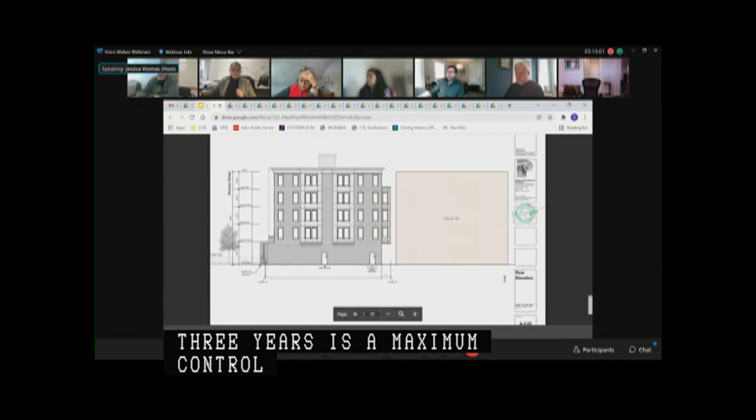And so this LOI is for what term? Three years is a maximum control of the user of the parking lot on the other side of Ziegler Street that they can secure it for, and that is what's determined at this time. But it can extend.

As you'll probably guess, I think that is insufficient. That is clearly not enough, because unless we expect demolition of this building in three years, this community is going to be significantly impacted by all these projects with a lack of parking, where there is no certainty that these spots will remain. There's nothing on the records or at the registry of deeds that will confirm that this parking will continue until the building is demolished to be replaced with something else.

How are the plans, Chair? It is important to have affordable units in the area. It is important to have black-owned businesses succeed in the area. These are not real estate developers, they're really trying to grow their existing business. This is a bit different a scenario, and there's been no community opposition with the exception from the board related to parking.

I think the board has received some notes of opposition, just so that it's on the record. But let's go ahead. How are the plans, Mr. Robinson?

Plans are good, really no question. I think the scope — we all understand the proposal at this point. No questions for me about what is being asked. Any questions from the board?

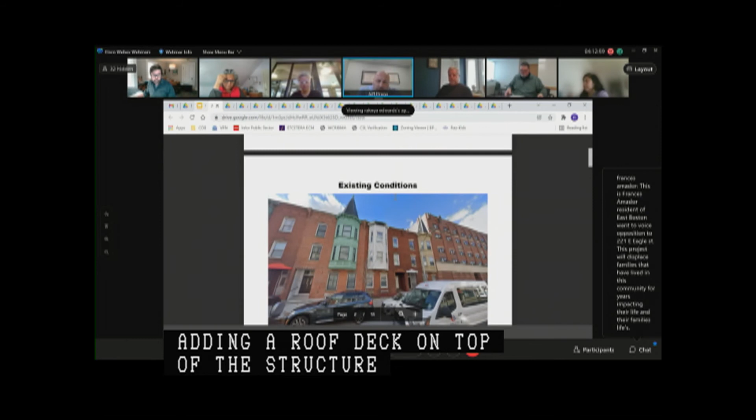The building will remain the same contours, and in that original rendering you can see we're going to restore the historic features in Eagle Hill to match the building to the left, rather than what's up there now. You can see in this picture the existing conditions.

So, Counselor, why were you deferred last time? Because the plans had to be re-reviewed, Madam Chair. There was a missing violation. So that violation has been read into the record today? Correct, yes. And that was a rear yard violation, it's a pre-existing violation.

Looking at the rear of the building, we're adding decks. Right now where that structure is, there are enclosed porches that were used for bedrooms. We're removing those to create additional space for each unit.

So Counselor, can you get to the point and tell us how that 4th unit is going to be created? Tell us if there's going to be occupancy in the basement, and go directly to that deck. Sure. As it's laid out now, there is space in the basement or lower level. It's 70% above grade with a full walkout in the rear. The unit is connected to the first floor unit, so that's a 6-bedroom unit as it exists now.

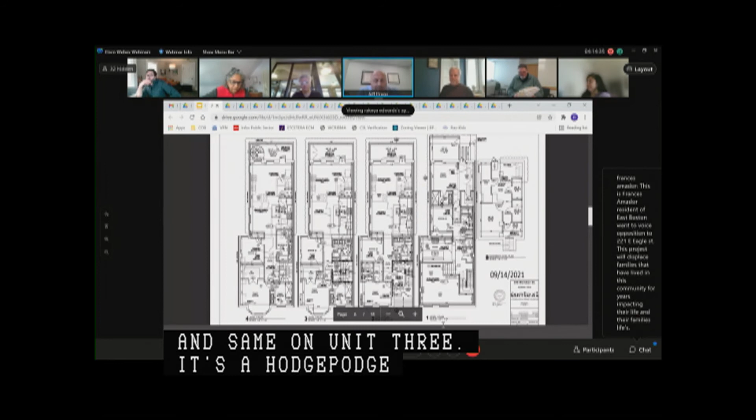Same on unit 2 and same on unit 3, it's a hodgepodge of bedrooms. Our proposal is to make that lower level a separate unit. There's also a basement below this, a sub-basement, that would remain and become just unit storage, accessed from the rear of the building.

The lower level would now become unit 1, a 1,220 square foot, 2-bedroom, 2-bath unit with a full rear walkout. It would have full windows for light and air, floor to sill at 30 inches, 2 means of egress, and ceiling height varying from 8'3" to 11 feet throughout the unit.

We go up to the first floor that houses the main entrance of the building—that would be unit 2. That's currently a 6-bedroom unit, which would be changed to a 2-bedroom, 1-bath condominium unit with a rear deck, at 1,050 square feet.

Going up to the second floor, that would house unit 3—again another 6-bedroom that would become an 1,170 square foot, 2-bedroom, 1-bath condo with a rear deck. Then the third floor would house unit 4, becoming a 1,250 square foot, 2-bedroom, 1-bath with a rear deck.

That unit would have a staircase going up to the roof for a new proposed roof deck, 199 square feet, exclusive to unit 4.

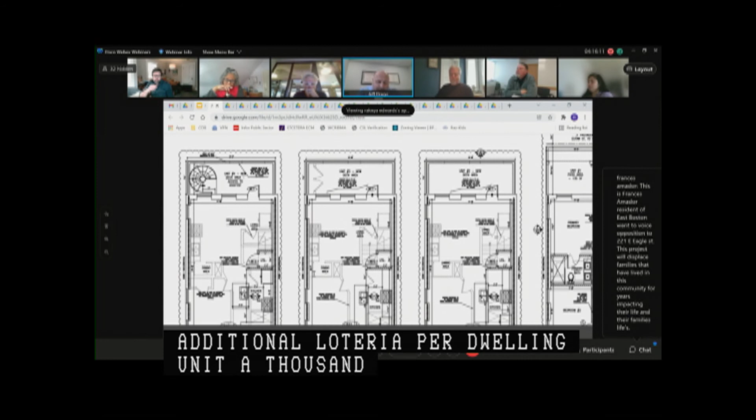To go over the violations mentioned: additional lot area per dwelling unit, 1,000 square feet would be required—we're slightly under at 916. FAR is pre-existing at 1.0, we're at 3.17 because the basement is already occupied as it stands now. Height in feet, 35 is allowable, we're proposing 39—we're not making the building any higher, but we're putting the roof deck on top. Rear yard, pre-existing, 30 feet is required, we're at 14, although we do have a full pathway out the back that can be entered for that bottom unit.

And is there going to be a handicap unit here? There's not a handicap unit, ma'am. Madam Chair, we are not required.

Since this is a gut rehab, what are you doing for LEED certification or anything like that? Again, light and air for windows, we're putting in foam insulation, we're actually adding a green space patio out in the rear of the property. We're removing the enclosed porches used as living space and making that outdoor space as well, plus all high energy efficiency appliances.

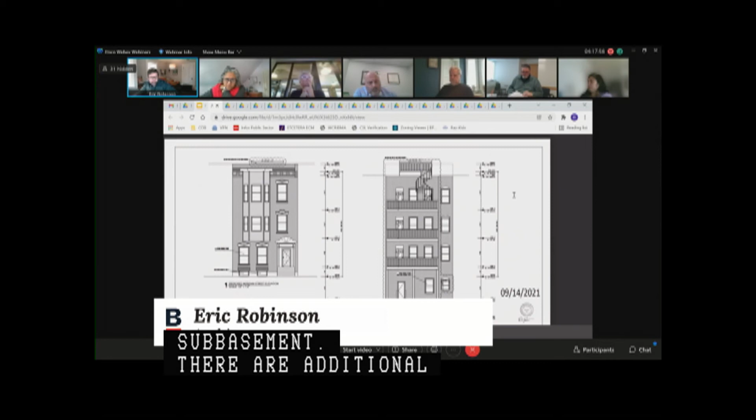Okay, thank you. How are the plans, Mr. Robinson? Plans are good. No question, the rear unit or lower unit is definitely above grade at the rear because there is a sub-basement. There are additional windows off the street too, so I don't have any concerns with the basement unit. The roof deck has direct access from the rear deck of the upper unit on the outside, so there's no hatch or access issue. So no questions from me on the proposal.

Any questions from the board? Is anybody here? I couldn't tell from the plans, Mr. Drago, where are the utilities—in the basement or sub-basement? Sub-basement. Okay, so that's unchanged? Correct. Okay, thank you. Is anybody here to speak either in support or in opposition of this proposal?

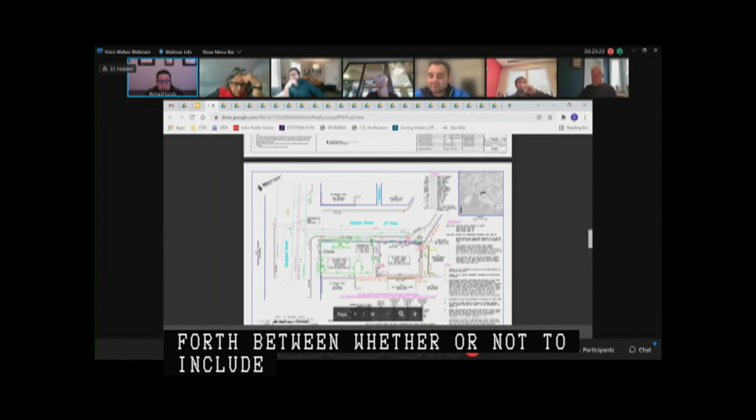We are proposing a conforming use, so the 3-family we are proposing is allowed under Article 53. Included with that, we are also proposing 3 parking spaces. When we originally proposed this project, we went back and forth on whether to include parking or to have a higher building to allow for it as currently proposed. The feedback we heard from the community was that although height was a concern, parking was the paramount concern.

So we had adapted the building in a way to try to address both height concerns as well as the parking issue. We do exceed the height slightly. The height limit is 35 feet for the district; however, we are proposing a height of 38.5 feet. As I said, this would be a proposed 3-unit building. Mr. Kirigati is building this as his primary residence, with 2 additional units generally available for his family, who live in Europe and travel and visit regularly to the United States.

Counselor, can you tell us how the parking is proposed to work? So we are showing here the floor plan. On the left side, we show 3 full parking spaces that would be accessed from Haynes Street. Marginal Street tends to be more traveled, so adapting a curb cut for the Marginal Street side would present more of a challenge. There is already presently a curb cut on Haynes Street.

There is parking that occurs on the site presently for patrons who are in the neighborhood; however, that is not necessarily required parking for any particular property. It is a separately assessed parcel, and was held as a separate parcel as far back as we can see in the title. And what's the size of that curb cut?

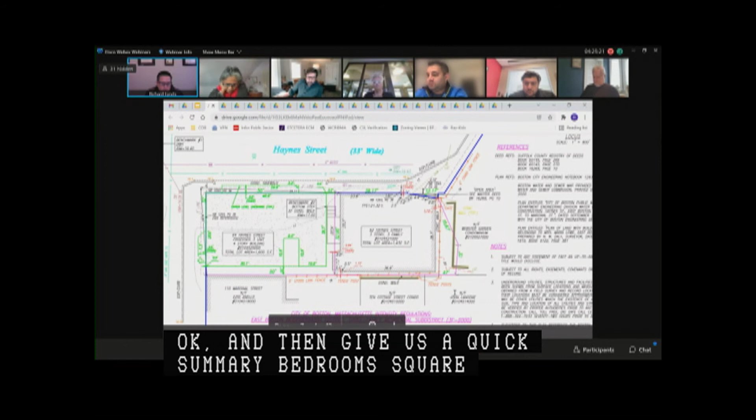Okay, and then give us a quick summary: bedrooms, square footage, and the roof deck. The lower units, located on the second level, are roughly studio-sized units, just over 520 square feet each. The upper unit, which would be the owner's unit, is 2,340 square feet, and it would be bi-level — accessed from the third level with an internal stairwell up to the fourth level, and then the roof deck.

I believe through design review that any portion of that railing fronting on the streetway would have to be pulled back to a 7-foot setback. And are you required to provide an accessible unit? I can let Mr. Zackerson address that. Yes, we will be required to provide a Group 1 accessible unit. Because we have an elevator, actually all 3 of the units will be Group 1 accessible.

How are the plans, Mr. Robinson? Plans are good. I think from a height and scale, it seems to fit in. It's obviously a corner condition, which is tough to deal with in terms of the parking access, but no real questions other than those two items, I think.

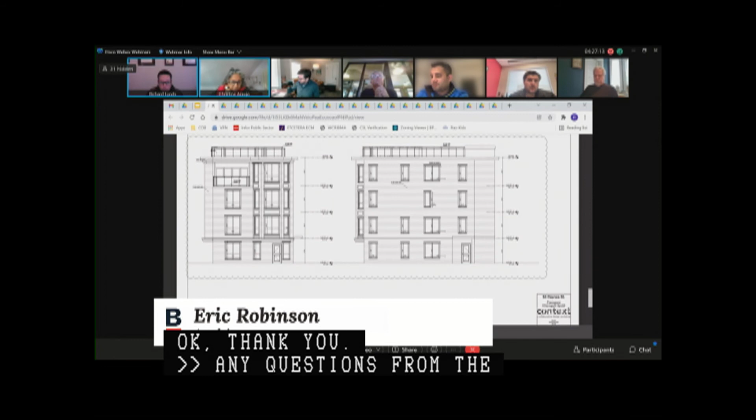Okay, thank you. Any questions from the board? Is anybody here to speak either in support or in opposition of this proposal?

Good morning, Madam Chair, members of the board. Natalia Benitez with the Mayor's Office of Neighborhood Services. Our office would like to defer to the board's judgment at this time; however, there are concerns from abutters and the civic association about height, design, and parking, and it was a tight vote at the civic association. Thank you. I'm sorry, Madam Chair, I couldn't hear what the position of the Mayor's Office was. It's at the discretion of the board. Okay, thank you.

Madam Chair, Secretary, here we do have letters of support and opposition. Okay, and Madam Chair, I do have a raised hand.

Jay Woodstock, can you give your name and address for the record, please? Hi, my name is Jay Woodstock. I live at 116 Marginal Street, and I'm a direct abutter. Good afternoon, Madam Chair and Board. I oppose this project. This is a 3F zone. The building is far too big for the lot, and there are no hardships for the required variances.

Thank you. No additional raised hands at the moment. There's a caller, I apologize, 781-592 — were you looking to give testimony here? I think we're all set, I apologize. Madam Chair, I do believe I had abutters who were speaking in support; I'm not sure if they're able to be noticed. Well, if anybody's here on this project, please raise your hands immediately.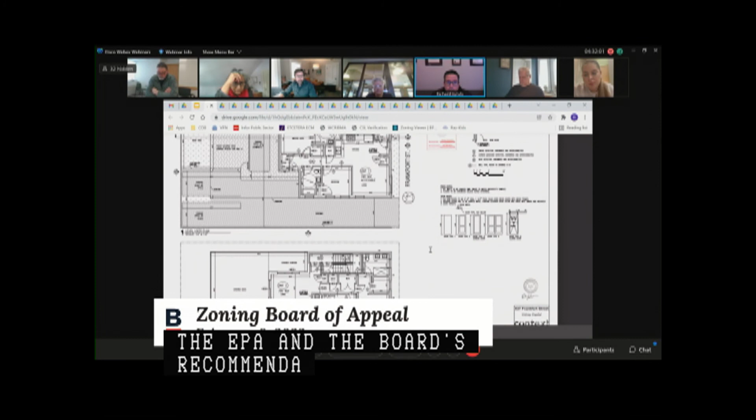We do show a rear deck, and we still are compliant with Article 53 of the code. The only requirement that is outstanding, because East Boston is under an IPOD, is the IPOD permit. I have communicated with Mr. Hampton from the BPDA, and the BPDA's recommendation was for approval of this, which is consistent with the board's ability to grant an IPOD permit. So essentially, Madam Chair, this project is as of right, including recommended IPOD approval from the BPDA.

The project would involve a total of 3 units, and again, that is a conforming use. Each unit, average unit size about 800 square feet, all of them are 2-bedroom. The building lot itself is 3,000 square feet. We're proposing a building that would be a total of 3,000 square feet gross floor area, which is consistent with the 1.0 maximum FAR.

The height of our building is 34 feet, which is 1 foot less than the maximum height allowed in the district. We do propose a roof deck. There is no head house that accesses that roof deck as well. With respect to the frontage of the property, we do have 40 feet of frontage along Frankfort Street. That is a lot condition that is not typical for that area. That does allow us to access the building at the lower level for parking under the building.

You can see here in the profile view that the building, again, does not go all the way back to the rear property line. We do show that. Please tell Ms. Edwards what drawings she should look at. Oh, I apologize. If we could scan back, I believe, to the site plan, that's probably the best one to start with.

This shows us the lower parking level, Madam Chair, where parking is accessed from the left side. We show Unit 1, which is an accessible unit at the lower level, and then we have 3 parking spaces located to the rear. One of those spaces is compact, 2 are full size, which is consistent with Article 53.

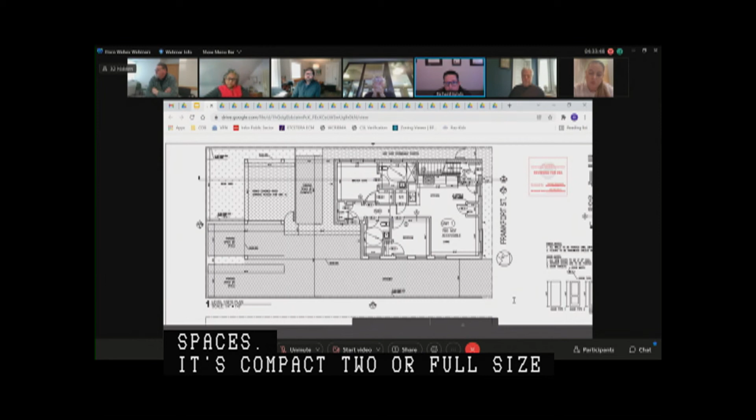As we move up the building, we'll jump to the next slide, please. No, I think we're good. We just need to understand that. Let me see what else.

Mr. Robinson, how are the plans? Plans are good, no questions from me. Looks like they have it taken care of. Thank you. Excellent. Any questions from the board?

Is anybody here to speak in support or in opposition of this project? Now remember, everybody who's calling in, this is a project that's as of right, and it just needs a checkoff for IPOD applicability. It meets height, parking, and FAR requirements. Okay? So given that information, please raise your hands if you would like to speak.

Good morning, Madam Chair, members of the board. Natalia Benitez with the Mayor's Office, Neighborhood Services. Our office would like to defer to the board's judgment at this time. However, this project has had an extensive community process. The abutters' concerns have been about height, density, and especially the character not matching with the rest of the street. Civic also voted in opposition, and our office has received more than a dozen letters in opposition. Thank you.

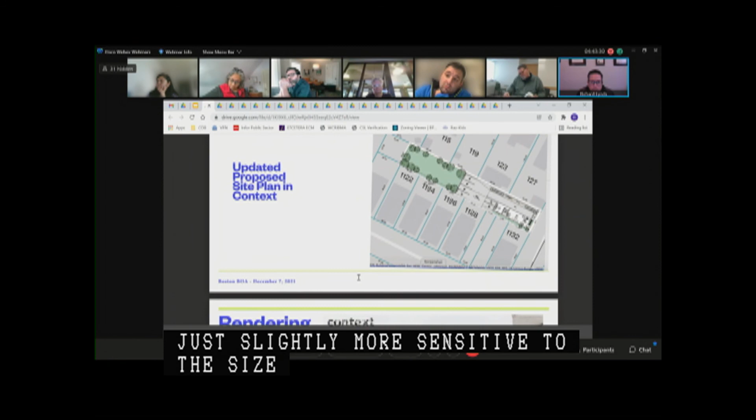As you can see from our updated site plan, we are dedicating half this lot to open space. We will preserve and maintain that as part of the condominium association, and we've offered that to be available as additional backyard space for our abutting neighbors on both Barnes Ave and Saratoga Street. We are proposing a 5-unit building with a total of 6 parking spaces. We've reduced the height of our building down from 4 stories to 3, and that was in direct response to comments that we heard from the neighborhood. If we can jump to the next slide, please, that'll show the current updated rendering.

What we're showing here is the corner condition of Saratoga Street and Shawsheen Road, which is the portion of the private way. The building on the left side of the screen is an existing 2-unit dwelling, which sits a bit higher because the elevation of Shawsheen, where we're proposing our building, is somewhat lower than the existing elevation of the current building.

Our building will not be higher than what exists presently at Saratoga Street. We would access our site through a garage entering into the rear for the 6 parking spaces we're proposing. Of the 5 units, 4 would be 2-bedroom and one would be one bedroom. The one bedroom is 750 square feet, and the larger units are 870 to 890 square feet each.

We do require relief, but as I mentioned, this lot is unusual in that it's much larger than most of the lots around it. Rather than building out a good portion of this lot with permissible setbacks, we've dedicated a good portion of it to usable open space to allow for a buffer between the rear properties shown on the earlier map.

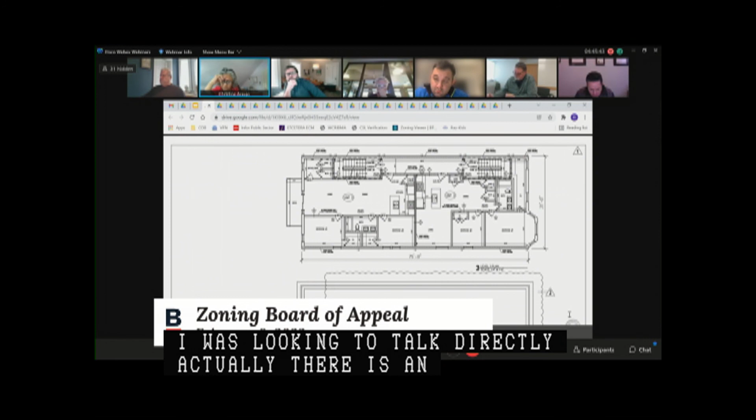Okay, and tell us about the height — it's 4 stories. What is it in feet? Actually, we've lowered the height, Madam Chair, to 3 stories. 3 stories — what is it in feet? 32 feet.

For some reason, parking insufficiency is red flagged here. Tell us what's going on with that. Sure, we are proposing a total of 6 spaces. Under Article 53, however, the number of spaces calculation would come out to 8 for the number of units we're proposing. I would point out that this lot is less than a block away from the entrance to the MBTA Orient Heights T Station parking lot, so it's in close proximity to public transit.

I understand from the BTD that there are recommendations for maximum parking. This is intended as condo, so we're proposing more than 1-to-1 per unit. There's 1 additional space available, whether for visitor parking or for another unit owner. But we are providing adequate parking for this site.

And let me just see, your accessible unit is unit 1 then? That is correct. We designed it to ensure that we do have accessibility.

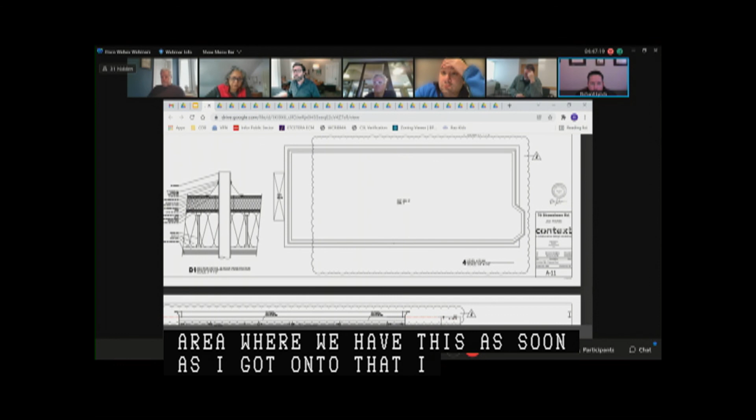And any roof deck on this? I believe — if you can jump to the next plan, Eric — where were we at with the roof deck on this? Mrs. Zackerson, can you respond to that? Yeah, I think, Madam Chair, we agreed in the last round with the abutters that we would remove the roof deck in order to address further height concerns. We only show rear decks off the back, and again, preserve all that open space to the rear.

Okay, how are the plans, Mr. Robinson? The plans are good. It does show a 3-story version, no roof decks as I can tell. No, I don't have any other questions.

It's just a very... Madam Chair, Mr. D'Amico did speak on this. I don't know if he's still on the call. Madam Chair lady, can you hear me? Yes, please go ahead, Bob.

Okay. Number one, I think the applicant would have to get the approval of the abutter, which I believe is the Von Corey Law Office, since it's a private way. They do have access and egress allowed to them. So I think the proposal should include the approval of the abutter across the street on the other side of Shawsheen Road.

And secondly, although it's not a BTD responsibility, the parking will be right on the borderline of 4 houses on Saratoga Street and Barnes Avenue. When I speak with Mira every once in a while, this is going to require screening and buffering. Now, I know there's green space behind it, but the parking spaces in the rear are not going to have any screening and buffering on the sides where the parking is included. The reason I comment on that is this may narrow the amount of area where parking will be required.

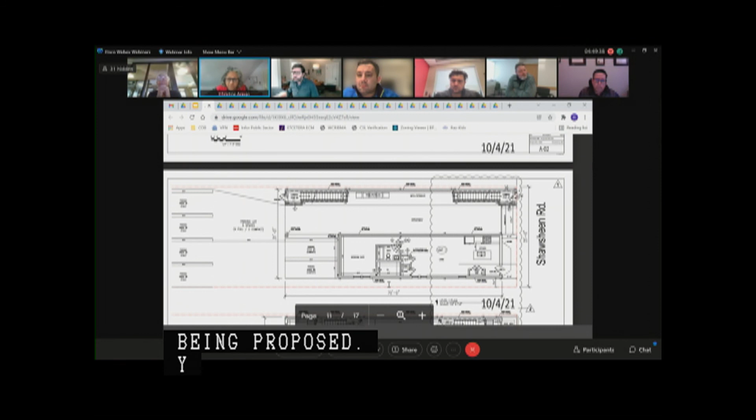Madam Chair, if I can respond on the private way issue briefly. Okay, any other questions from the board? Yeah, Mr. Lynch, can you just walk me through it?

It looked like there was a garage door, and there's a garage door on the other side that takes you out of the building. Through the chair, Mr. Ruggiero, if we can jump back to that floor plan a bit, the ground level plan. So we do have a driveway, garage, lack of a better term. You wouldn't park vehicles in here, but it'd be a driveway through the building that accesses out to the rear and gets you the parking spaces that are to the rear of the building.

With respect to Mr. D'Amico's comments, absolutely we anticipate screening and buffering. And with respect to the private way, from a title standpoint, we have equal rights in the private way as the abutters do across the way. However, I did have a conversation with them directly, and they have no objection to this project.

Just so I have some clarity, I mean we could handle this in design review anyways, but so there'd be a garage door on the front. So in theory, if you just saw the front of the building, you wouldn't even know that the cars are coming out on the other side. It would look like a normal traditional garage on the front. Correct, that's correct, Mr. Ruggiero. I just didn't want like a hole in the building. No, okay.

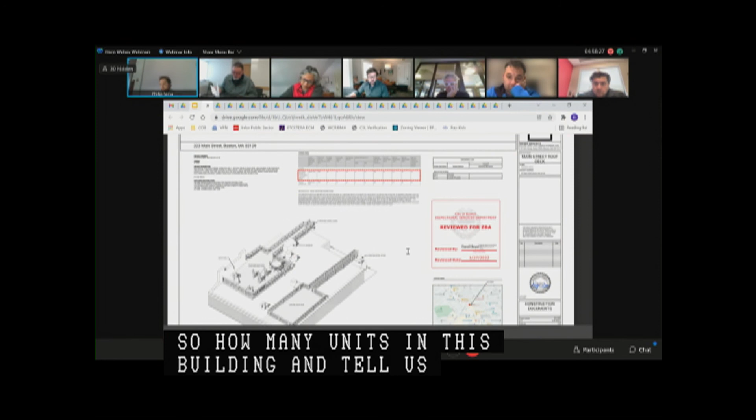Hi, I'm Philip Sema from Balance Architects, representing this project. I'm at 1 Thompson Square in Charlestown. There are 3 commercial units on the ground floor and 4 residential units spread over 2 floors. The design we're proposing is a roof deck on the left. This will be private for my client, accessed through spiral stairs off of an existing deck in the rear. It's very similar to what you see in the existing roof deck, just at the bottom of the axon there. It's about 680 square feet, with cable railings, some outlets for electricity, and a small storage bin towards the rear.

So let me ask you, will this be a building with 2 roof decks on it? Correct, yes. And did this project come to this Board of Appeal for approval of that first roof deck? Yes, and that was approved probably about 2 or 3 years ago. Okay, and who has access to that roof deck? So the units are split left and right side. The unit on the right side is using that existing roof deck, and we're proposing for my client to use separate stairs on the left side for their roof deck.

Okay, how are the plans, Mr. Robinson? Plans are good, no questions. I think the scope is drawn fine. Okay, any questions from the board?

Is anybody here to speak either in support or in opposition of this proposal?

Good afternoon, Madam Chair, members of the board. Caitlin Stapleton with the Mayor's Office of Neighborhood Services. Our office held an abutters meeting for this proposal on November 29th, where there was no concern shown by abutters. I have received one letter of support and one letter of non-opposition. At this time, we'd like to defer to the board.

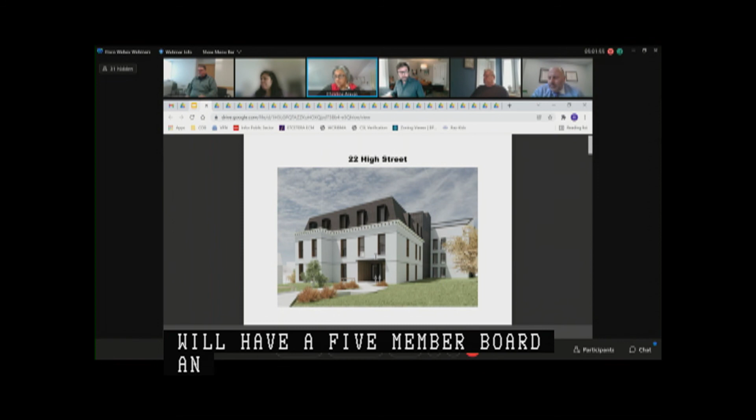Same. I'm sorry. So, Councilor, we will have a 5-member board, and you would need all members in support of this. You have two options: one is to proceed, or the second is to request an administrative deferral for a date when we have a fully active board. We're going to go forward, Madam Chair, respectfully.

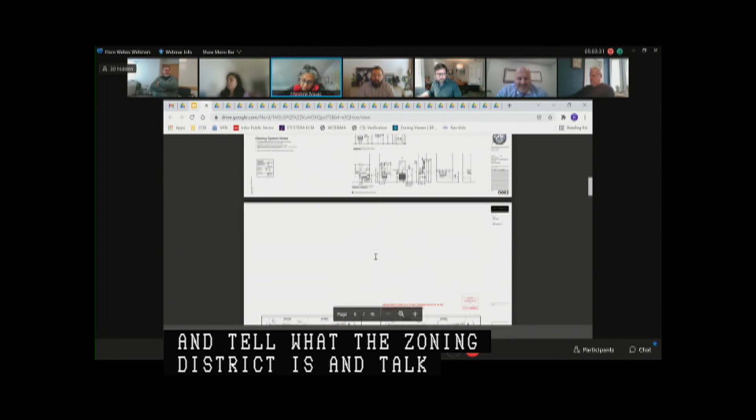Madam Chair, yes. So the district is a 3F 5,000, although there are different mixes of properties in the area from multifamily residential to 2 to 1 to 3. The reason why we were deferred: we met with Meeting House Hill, which is the Civic Association, and in meeting with the group, we reduced unit count and changed the design of the building as well. So we significantly reduced unit count over a period of a year, going from 27 units down to 15 that you see now, but we're able to still keep the affordable inside the building.

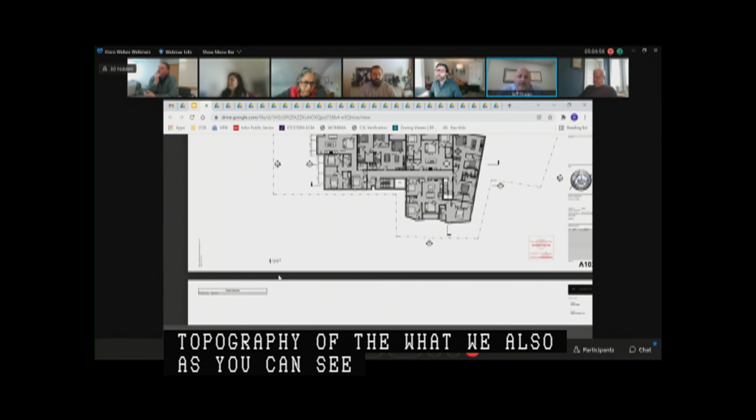To go through the violations you mentioned: the height allowable for this particular area is 3 stories at 35 feet. We are at 46 feet at 3.5 stories, although we designed the building on the High Street side to be at 3 stories, and as you go in the back, the peaks rise up, but there's a significant grade change in the topography of the lot. We also have a great deal of open space, which was important to our neighbors in the rear and in the front, so we've got open space that's usable both in the front and in the back of the building.

So tell us about the yards, because I just want to make sure that neighbors aren't feeling crowded by this proposal.

Sure. Yes, so just to go over our rear yard. So we've got 51 feet 6 inches, that's the farthest point, and that varies as you go back, but that's our farthest point, and our lowest point, it's 10 feet.

On our side yard, it varies as well, but we are at 11 feet 11 inches, and then our lowest point, 3 feet 9 inches. Our neighbor to the right is set to the 11 feet 11 inches, and to our left, we would be closest to a driveway on the left-hand side at around close to 3 feet 9 inches.

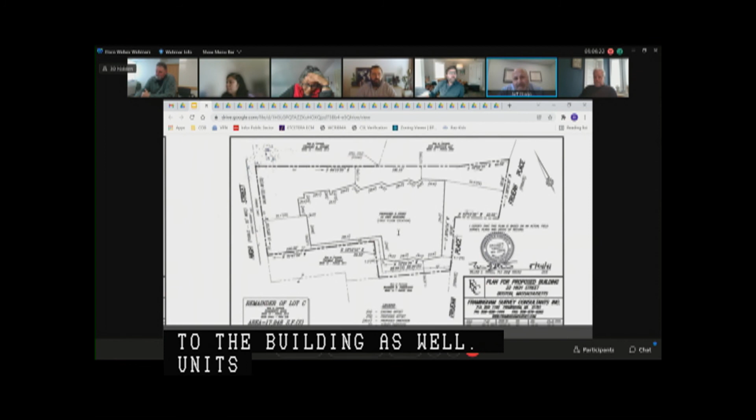And so parking is underground? Correct. Yes. And tell us about the roof deck. So there is a common roof deck on top, and that has 2 means of egress and an elevator to the building as well. Units 12 and 14 also have private access roof decks. So total, there's a common roof deck and then 2 exclusive roof decks on the roof.

Just to go over the layout of the building, our lower level has a 10-foot driveway and a 5-foot walking path for pedestrian access, leading into a door that goes into the bike room and into the garage. There are 15 parking spaces inside, a dedicated bike room, trash room, and mechanical room, all on the lower level. The first through the 3rd floor all house 5 units. The top floor has the roof decks, and 2 units have an extra bedroom space up there as well.

Tell us about the bedroom breakdown and the square footage. Yes, so they're larger units - 8 2-bedroom units at 1,150 square feet on average, and 7 3-bedroom units at 1,475 square feet on average, for a total of 15. 2 of those will be affordable - one will have a 50% AMI and the other a 60% AMI.

Okay. How are the plans, Mr. Robinson? The plans are good. As you can see by the geometry, it's quite a difficult site. I'm very familiar with it. It does drop off quite a bit, as you can see in the topography and the site plan. So it's complicated, but I don't necessarily have any questions, knowing this went through the BPDA design review process, Article 80.

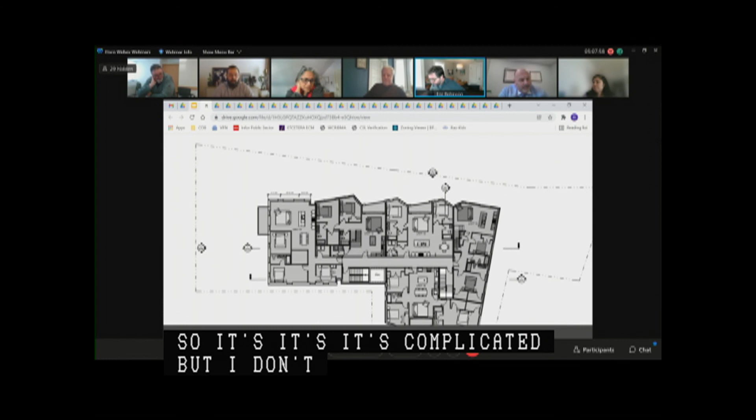Thank you. Okay. Any questions from the board? I'm just wondering about the roof. You got a common roof deck and 2 private roof decks, and an elevator. What's the access to the 3 different roof decks? So the exclusive you're talking about, Mr. Ehrlich? You said there's 1 common and 2 exclusive. Correct. So I'm asking what's the access to each of them?

The exclusive ones have separate access. The common has the elevator and a staircase. And the exclusive ones have, what is it - a head house? Oh, the bedroom, because there are 2 rooms up there, literally connected, so there are bump-ups for bedroom space up there. Mr. Ehrlich, they're not technically sitting on top of the roof - they're kind of embedded in the slopes of the roof, so you won't actually see them from outside. They're sort of almost internal, exterior but internal terrace-y things. Understood. And the common roof deck is accessed by a stairwell and elevator. Correct. Okay, Mr. Robinson, I like that technical term.

Yeah, don't intimidate us.

Okay, I think we covered all questions. Is anybody here to speak either in support or in opposition of this proposal? Good afternoon, Madam Chair, members of the board. Denise DeSantos here from the Mayor's Office of Neighborhood Services. This time we would like to defer to the board. The applicant has met with the community for a long time, they've worked with the neighborhood, and they do have the civic support. Some abutters were just concerned around parking and density, but they have met with the Civic Association a few times and have the civic support letter.